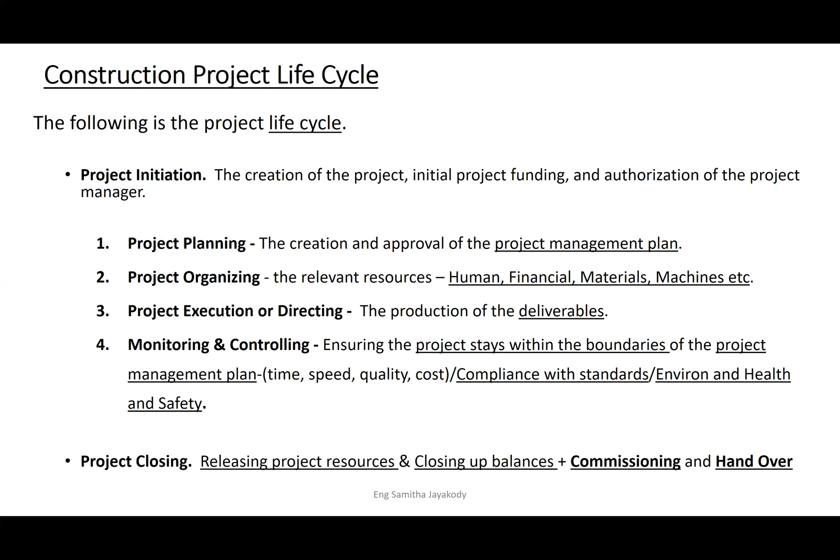Then some myths of project management. We believe in some myths, like that the project manager is the key. Normally we say he is the man, but it is teamwork. Then that projects are directing jobs; we say shouting and going in front and that stuff. Generally projects are not directing; the major component is planning. There should be a good plan. Then that progress is the key. Sometimes we think speed is the key.

Yes, but going above on the timeline is very important. But it has to be balanced with quality, cost, and safety. We can't negotiate because of the speed, the quality, the cost, the safety, and also environment.

Then project management, we normally think it is a science and art, 50-50, but it is not so. It is 20-80: learned stuff is 20, 80 is artistic, or the experience. So it is based on tacit knowledge rather than the learned knowledge. That is why when a project manager becomes matured, he becomes more efficient, well experienced and more effective on

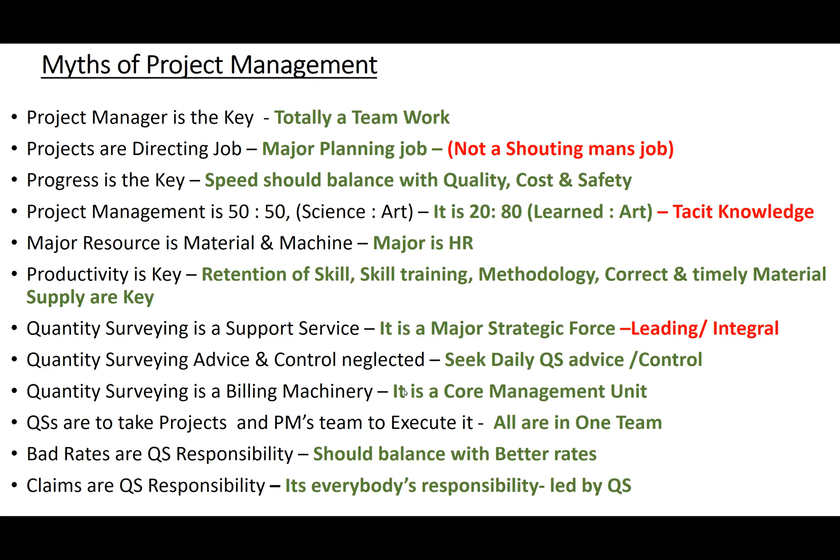Then claims: it is a QS responsibility, but it is everybody's responsibility, maybe led by a quantity surveyor. So construction, quantity surveying, everything is interdependent activities in a project. So we should know these things before we go into project management education.

Then major project areas to be managed is very, very important. And I have given all the planning documents and the tools on these major areas. Why I have scoped up this area is because some project managers unfortunately manage one or two aspects of what I'm telling. He may be a scope manager, but you call them project managers. Then he might be interested in progress and time management, but it is not like that, it is a big picture.

So we have to manage scope, progress and time, quality, safety, environment and health, cost, communication and data and reporting, human resource and subcontracting, procurement, contract management, resources and waste management, then protection and security, risk management, and we have to do integration management as well. So from today, we have to seek the big picture. Sometimes we may be seeking only 1, 2, 3, 4.

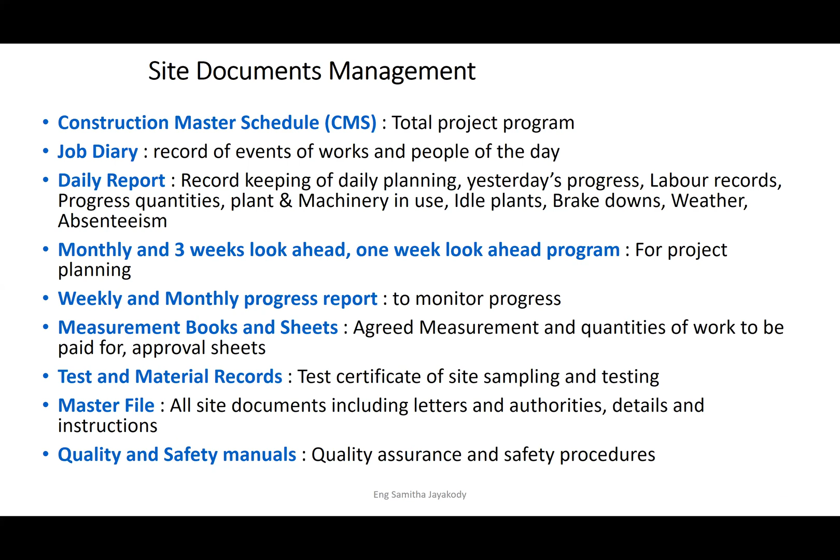Then if you take the project team, there are 4 tiers. The client and the principal or the promoter, then consultants are there, or the engineer to the project. Then the contractor is there. Then other teams. Other teams are construction management teams, financing teams, other special subcontractors, special consultants like acoustic, green.

Then local authorities, BOI, if you're doing duty-free projects. Then material suppliers will be there, the government organizations, authorities, then the environmental authority, UDA; all these are other people. So there's big teamwork.

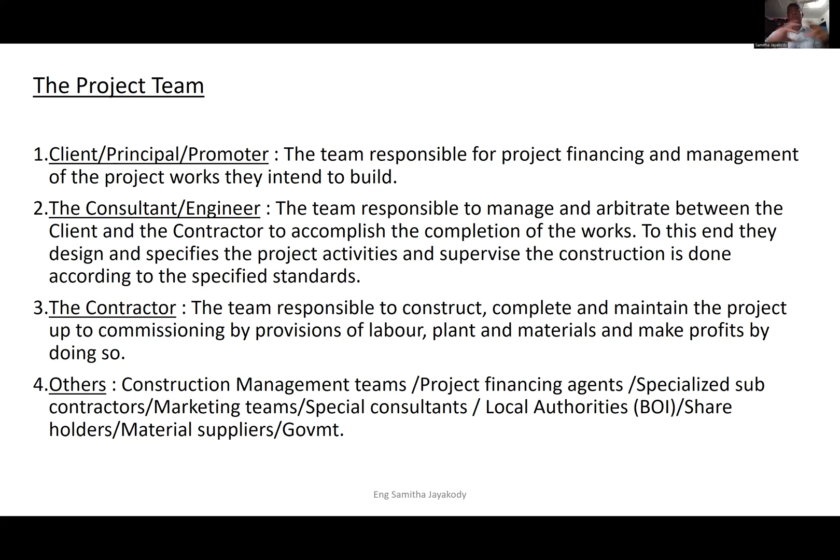Then when we are amalgamating different teams or factors or entities, institutions, we have to have a good bond. So that is why each and every bond is being contracted. So the contract is a legal document between two parties or tri-party or maybe more, binding them to fulfill some duty or activity. So when the teams are more, different contracts will be there. So the main contract will be there, subcontract agreements will be there, supply agreements will be there, 1000 agreements.

So managing the procurement is also very key. Sometimes we miss one, two, three of the major key areas, which will indirectly affect the effectiveness of our project management. So we have to have balance, not to miss anything. Sometimes we do everything, but our safety and also quality management is bad. So then there will be a lot of repercussions.

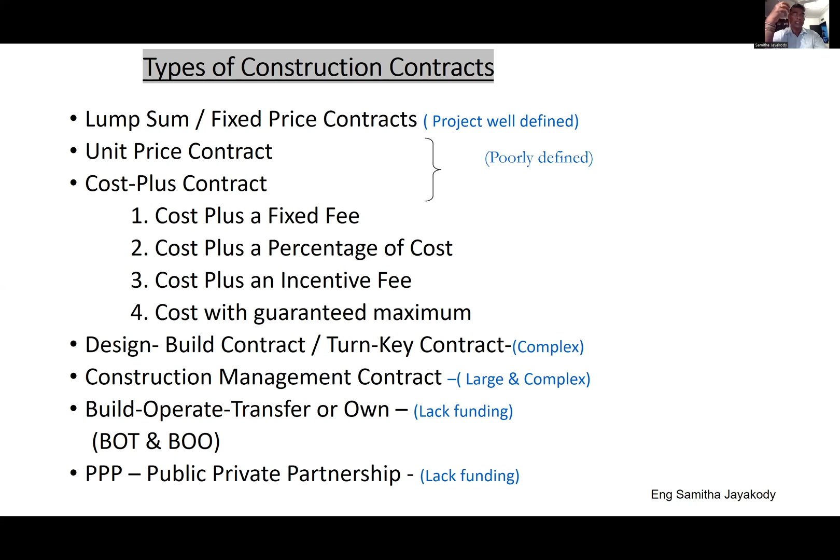Then, project management software packages are tools. I have seen a lot of people become slaves to these tools, and it is not a fashion. Tools we use to create a good environment, which is to make our life easy, because with progressing and planning we can't keep everything by heart. That is why we are using software. But software is not project management; it is a supporting tool.

So we must get the support from the tool and execute physically in projects. Many people are slaves to things, even design, even planning. You do everything in software, but you have not visited the site. You don't know what is happening on the site. That's bad. When we are using software, we have to scale it, visualize, then logical intervention has to be there. All this has to happen by a human. So if the human using this tool lacks experience, there will be repercussions in the output. Garbage in, garbage out; if lacking information is the input, your reports are also not complete.

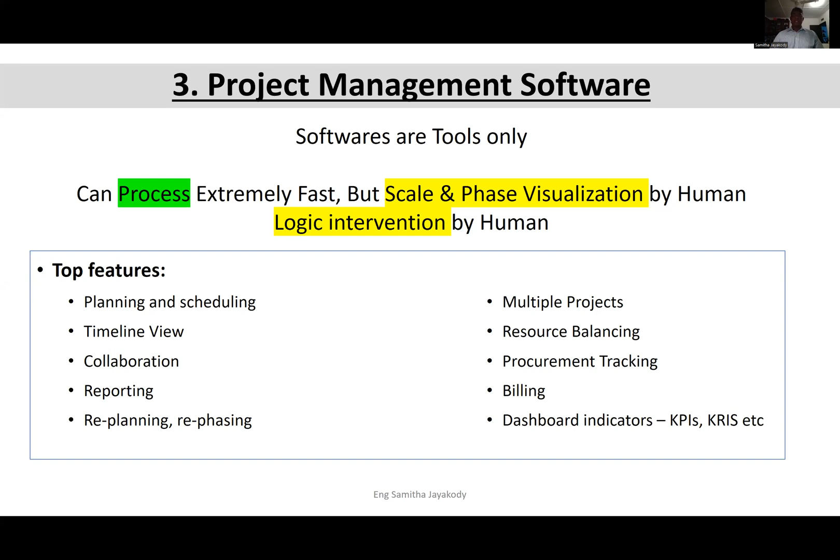And top features: we are using software for different things. I have given billing and everything, planning, collaborating, reporting, everything we can. So why not use software? We have to use software aggressively, but the intervention is human. The human touch is much appreciated and demanded. Then the features: you can keep all the data, safeguard it, reproduce it. So I have given the computer and its features and advantages.

In projects, we will be very extensively using MS Project in planning. Sometimes once the plan is done, nobody looks at it. It's huge, 500 to 1,000 pages, but you don't utilize it. Based on your requirement, you can summarize it. Then the planner who is planning this has not elaborated or transferred all this information to the respective doers. That is where there's a lacking. So this planning tool has to be simple and understood by each and every management tier, and it has to be practical.

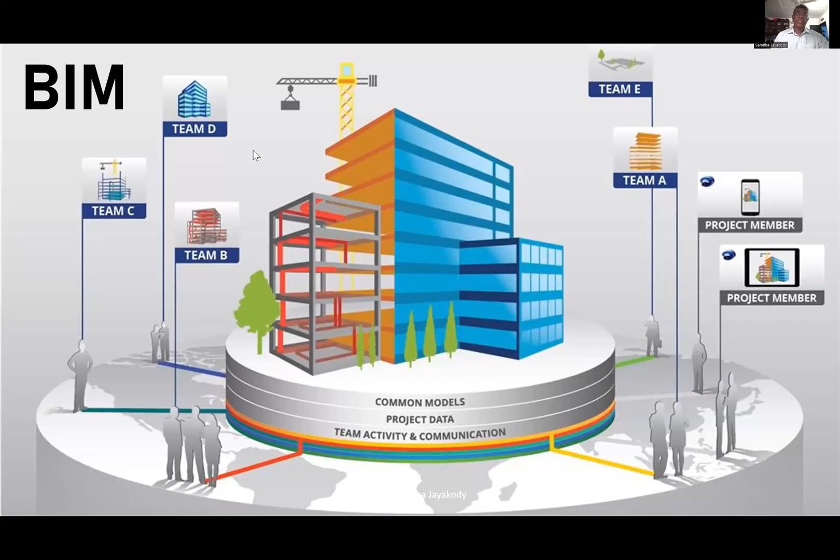Then what is most important is not the data, but the information. Data is something like all these figures, but when you convert it into information, it will give trend lines, colors, like a dashboard. So we can get some sensible information. What matters is not the data but the information. Sometimes our computer will be full of data, but nothing comes out as profit or loss or rate analysis, something like that. So it has no meaning.

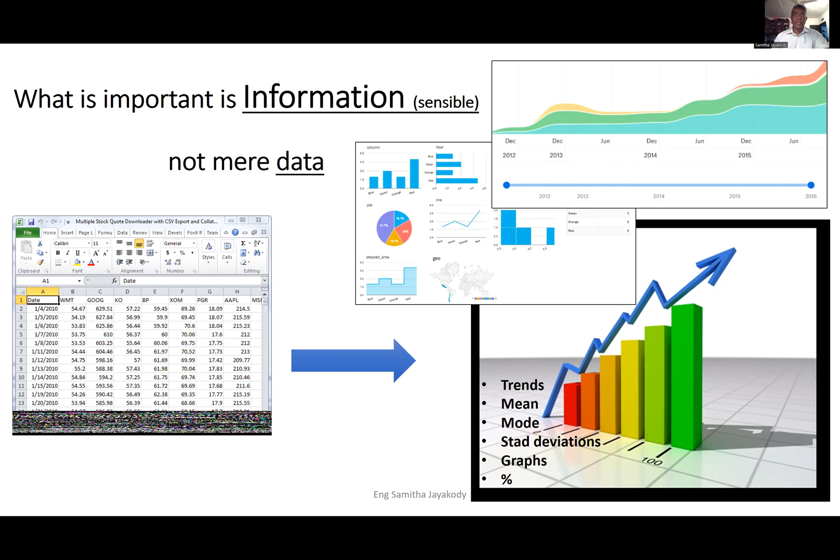Then when you move to pre-tendering, when the projects are being offered, whether you are on the client side or the contractor side, we have to go through the pre-tendering stage. There, if you take a contractor for example, we have to formulate the tendering team or bidding team, the tendering and quantity surveying outfit, we call it. And there are roles in the bidding. There should be a team leader who is inspiring, a leader, wise, innovative, team spirited and a listener. Then we have to have a good coordinator in this tendering team, because now we are going to get a job or give a job.

When we are formulating this team, we have to cast different people to act in these different roles. Then the coordinator, the organizer, will have knowledge in all the aspects. Then a contract specialist should be there.

He should be a good reader and a narrator. Then qualified in knowledge in contracts. Then a civil expert should be there, who knows all the civil engineering aspects, construction. Then MEP expert, material expert, plant and equipment expert. Then there should be a subcontract and labor specialist who has good knowledge on outside rates, their outputs, then the market, demand and market rates, and the availability in all these aspects.

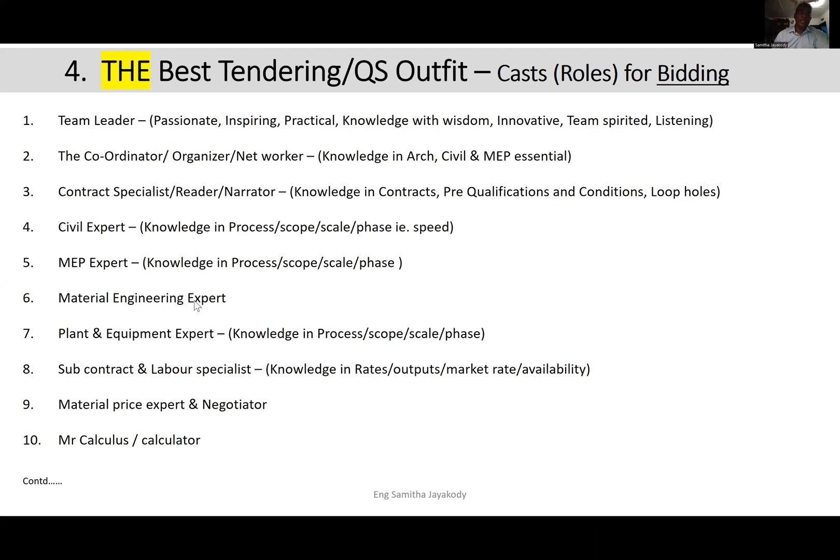Then material price expert, who is a good negotiator and an expert in material pricing. All the materials he has at his fingertips, the prices and different locations. Then there should be Mr. Calculus, who is very good at calculating without missing any major data. Then there should be a planning engineer who knows about planning and milestoning, productivity. Then scope extractor, who is getting all the basic material and the locations from the BOQ, has the big picture about the scope.

Informant, that is getting information from outside. So different companies now have these projects, and they have enough projects or there is a lack of projects. Their appetite for projects, right? And are they going for better margin or lower margin to get a project? So that's informant. Then timekeeper, who communicates the time. Okay, another 1 week we have to now wind up.

Then intuition expert, the moderator, proofreader, compiler, then specialist, and extraordinary task seeker, who is looking at very special things in this project, what are the basics you will have to consider. Then strategist, then won-loss project post-mortem expert, because past history, are we having the winning streak or losing, why we lost. Transport expert, claim, value engineering expert, and different people will look into their aspects, whether there is any value engineering that we can do here. That expert will look at it. And the environmental and social specialist, so they will know what is the environment and the green and so on. So this is the winning team.

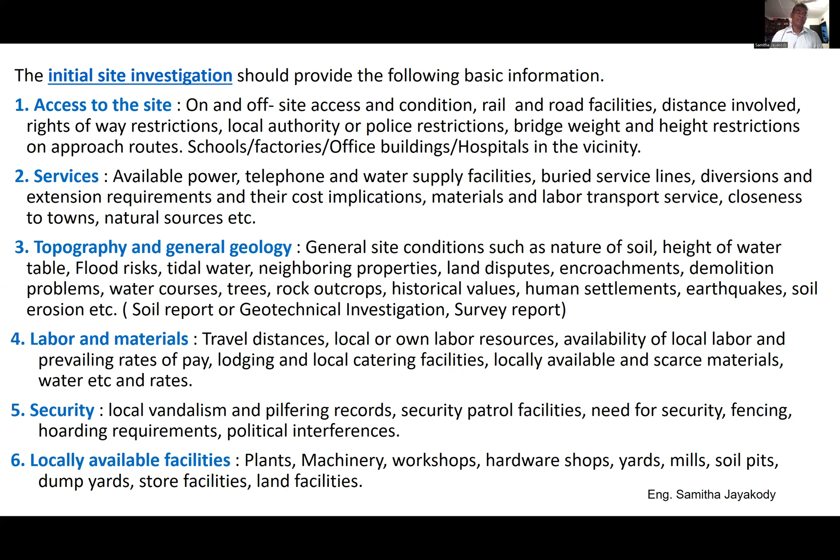Then topography, then the general geology, rock, soil condition, then historical value, human settlement, trees, water courses, then erosion probabilities, sloping ground, disputes, neighboring properties. So those are topographical and geological information we have to take. Then labor and material pertaining to that particular area has to be studied. The lodging, maybe catering, the food. For example, if we are planning a project in Jaffna, we have to see all the things. So topography, geology, different. Then labor and material different, because we have to take labor from here to there.

Security is very important. Then locally available facilities are also very important, like soil pits, mills, yards, dump yards, quarries, and so on, because we have to buy material. So that is the initial site investigation.

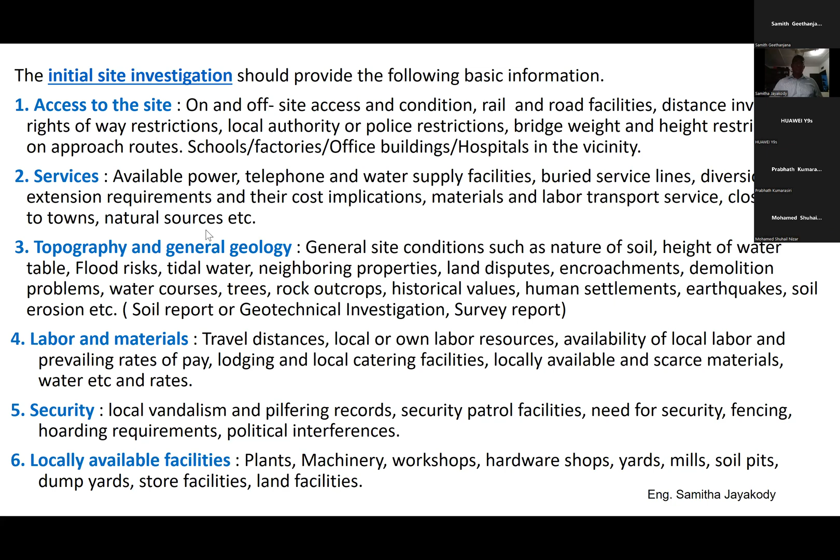Then engineering study of the project, visualization is very important. You have to identify the client, the consultant, type of the project, funding agent, other stakeholders, competitors, and likewise we have to visualize all of this.

Then I mentioned that we have to extract the total material quantity. This is in pre-bid, we have not yet taken the project to manage. So during this exercise, we will be taking all the levels - floor area, concrete in meter cubes, reinforcement in metric tons, formwork, brickwork, tiling, painting, and others, ceiling, everything.

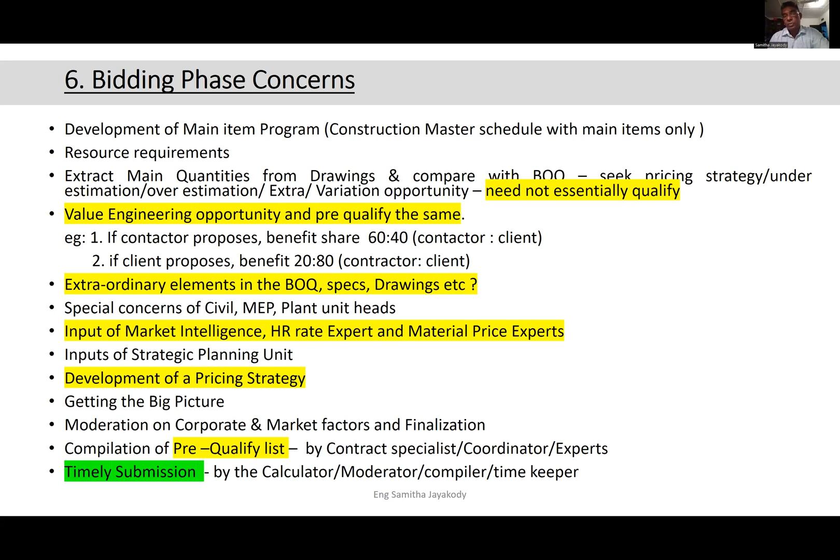Then extraordinary elements in the BOQ specs - what are the things, then input, market rates, pricing strategy, and some idea about the big picture. Then pre-qualification list, that is very important in the bidding stage. Then timely submission - so in the bidding phase, we have to be concerned about this.

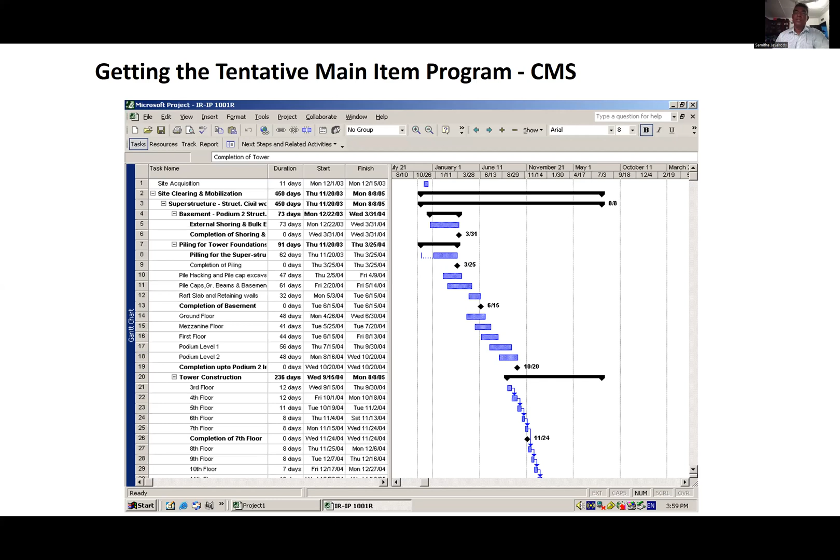So I said we have to do a basic program, something like this, 1, 2, and 3. That's all. So that will be given, maybe for a 2-year project, and everybody understands how the structure goes on and how the finishes go on.

So basically they can have some idea when to start, when to finish, and there are no links, right? Then in this pre-bidding phase, the bidding phase, we will be taking from the earlier schedule the monthly productivity requirement - it is very important.

Quantities in monthly requirement. So for this example, I can say that formwork monthly production output requires 2,500. Reinforcement 80 metric tons. Brickwork 900 square meters. Likewise, month-wise, we will get all the monthly production requirement.

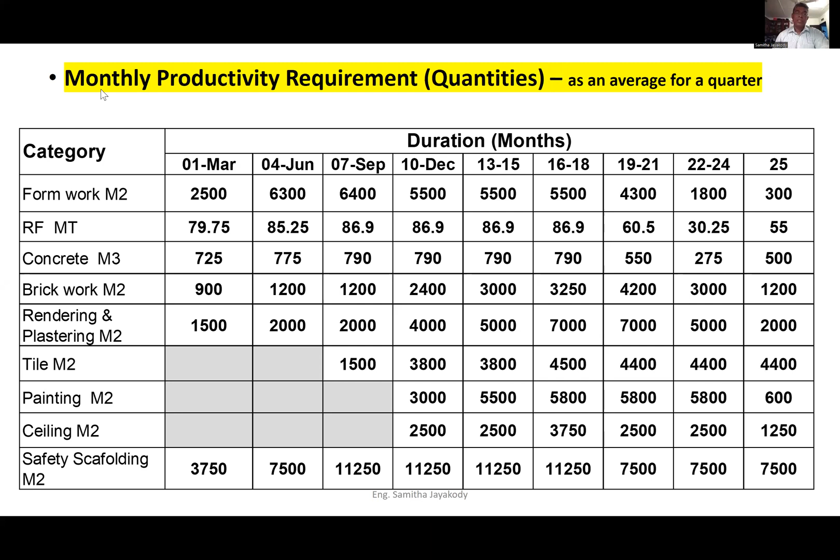So in the early months, we have only reinforcement, concrete, brickwork, excavation, those stuff. Later on we will be having tiling, painting, and so on - per day, per month. So from the monthly quantity, we can derive the daily productivity requirement.

That is, in this project, daily we have to produce in the early first 3 months - each month we have to give 100 square meters per day. Reinforcement 3 metric tons per day.

So from there we will jump into our labor requirement per day using norms. We have norms. For example, if you take formwork...

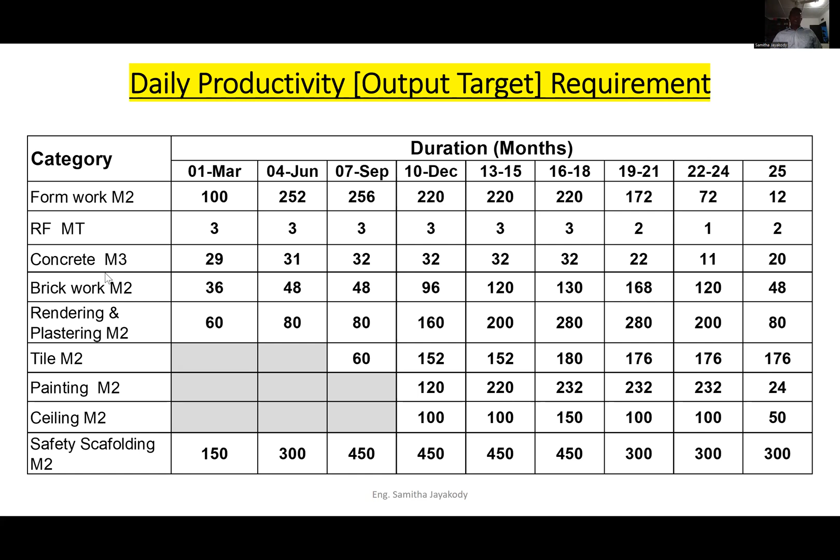150 to 200 kilos per person per day. So based on that, we can calculate what is the labor requirement. So in this case, we require carpenters, 25 carpenters per day. So based on that, we can get all the labor requirement in months.

So this is a more than 1 or 2 year project, and you can see that across the months we have to have this labor force of 97. Likewise, from the 4th month, we have to increase the labor strength to 200. Likewise, we can calculate our labor force throughout the project.

So there are nearly 400 workers in the 16th, 17th, and 18th month. So that is the peak. We have to arrange our labor camps based on this. Sometimes we will be arranging labor camp for 200 people, and later on, once the building is done, the balance we can send into ground floor, basement. Or else we have to have a labor camp for 400 people. Gradually it can be increased.

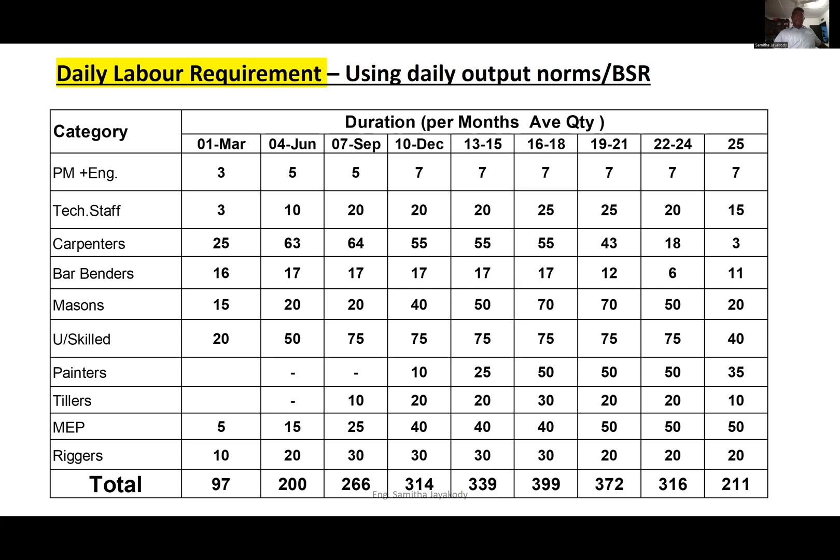And preliminary, under preliminary, we will be charging it. So likewise, we can plan. This is pre-tender, during the tendering phase. Then scaffolding requirement, also we have to plan in this pre-qualification or pre-tendering stage, because we are now planning to get a project, so what is our involvement. Based on this, our cost will differ.

Then we have the plant list. There also we calculate our plants and in what quantities. So in this case, you can see cross-cut saws. For carpenters in early months, it is 10, and it is going up to 20, so 20 peak per day cross-cut saws will be required. So then we can cost it, maybe hiring or maybe buying.

So quantity surveying, that is why I told it is going hand in hand.

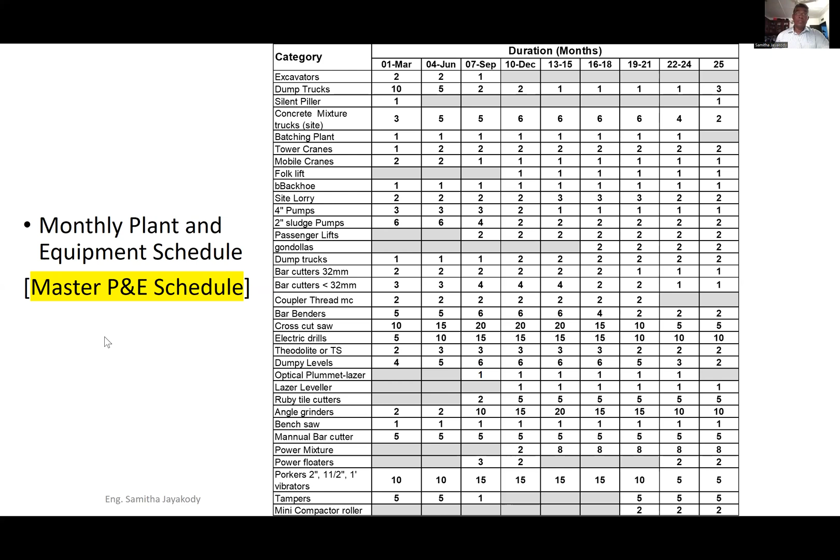Then material requirement list. Based on the total extraction, we can see what is required in this project: sand, admixtures, metal, different bars, reinforcement, then hinges, then granite requirement, lock requirement, plywood requirement, brick requirement, block, tiles, ceiling, likewise. So when you have this, we can negotiate with our suppliers. Sometimes we call this forward integration.

I will show that cement, if you have the bulk cement requirement in metric tons, it is 17,000. So it's a huge quantity. We can negotiate with some suppliers: okay, if I give all the aspects to you, what is your best price? And we can have a strategic partnership, that is we call forward integration, and we can get a better price than the market, assuring that we will give all the total material, we will buy from you, so give your best price. So likewise, we can have a pricing strategy.

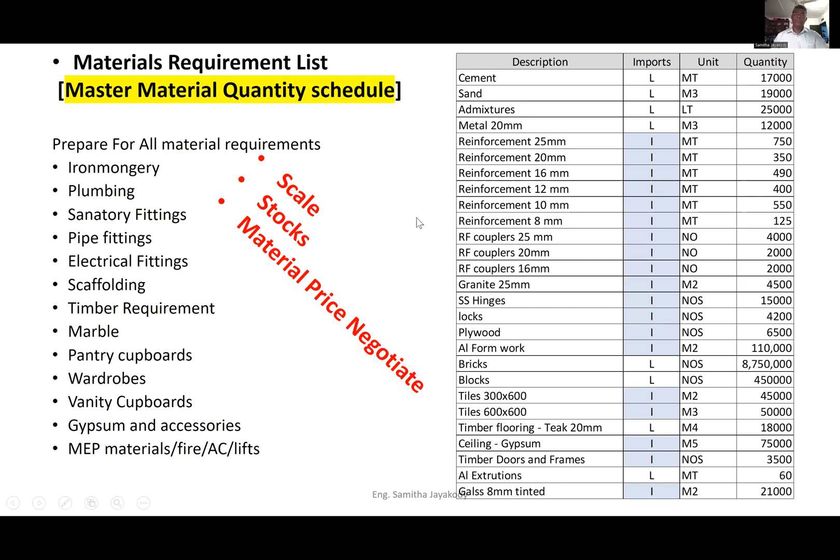So if you do a shabby work, you will be missing this tool advantage. If you go by this procedure, it is easy and very scientific. Then when you are pricing, there should be a formulating of pricing strategy.

So normally bidding price is based on our pricing criteria. It is an amalgamation of basic cost, which is very common to each category. For example, basic cost in Colombo for grade 25 concrete for major contractors, CS2s, Maga, ICC, Sanken, Access, like thing, the basic price is same.

Then to the basic price in total we add markups. Markups are an addition or percentage increment. Markup consists of profits, normally 5 to 10%. Then head office overhead, site overheads, then different costs and risk factors, the quantity price risk. Normally we put 3 to 5% in the quantity risk if we don't know the quantity. If you have very dicey pricing, we also keep a pricing percentage. So add on, it is about 25 to 35% markups. Plus preliminaries, normally 5 to 8% from the total budgeted thing. That is how we check.

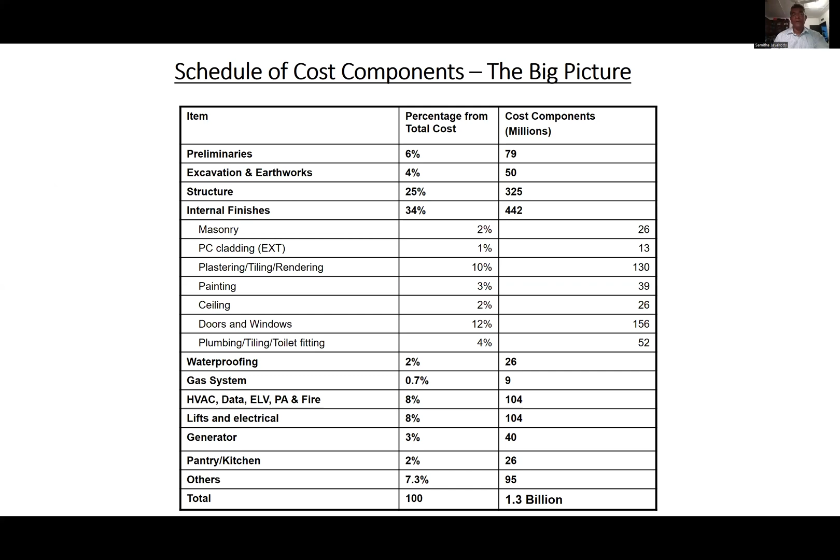Then pre-qualify conditions: we are using this cement type, this cement reinforcement brand, this formwork, aluminum brand and silicon is this, mix designs are this, early removal of formwork facilities are this. Likewise you can pre-qualify, which is very important during this.

Give elaborate assumptions: this is our dollar price, assume the tile brand is this, likewise qualify the pumps, the AC air conditioning brands we elaborate, ironmongery we elaborate. After that, the client or anybody can't ask for the sun and the moon, because you've already pre-qualified. We price based on these categories.

If there's something missing, it might come out during the evaluation. The guarantees and warranties, then nominated subcontractor concerns, electrical fittings and accessories, the brands and everything, missing items, risk, we can qualify.

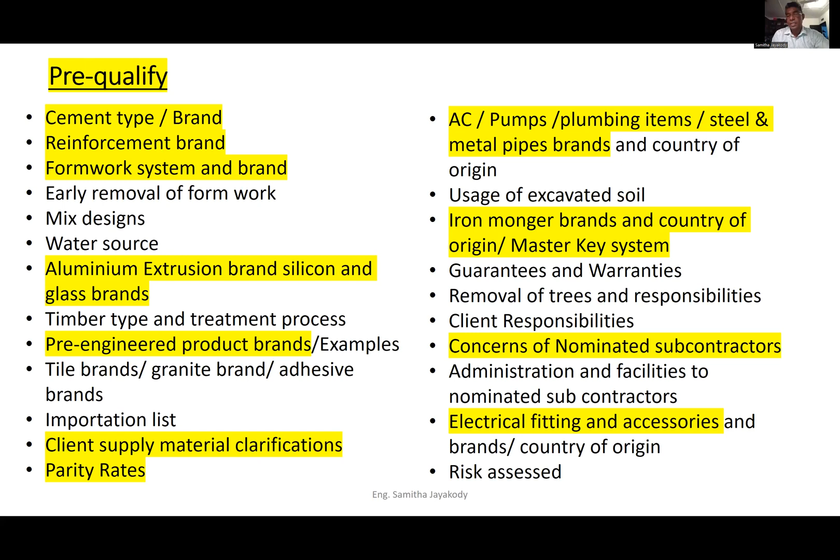Then we have to check outcomes. You can use unit price rates to check whether your total figure is correct. Output rates and steel concrete ratios are there to check. If it is normal concrete, it is about 110 kilograms per meter cube. If it is earthquake design, moderate, it should be 150 kilos. If it is moderate earthquake, not minor, well detailed, it might rise up to 225 kilos per meter cube, a little larger.

So we can check if the structure is given as earthquake resisting and the reinforcement is very low, then we can pre-qualify, thinking that it is missing the earthquake moderation. Something like that we can pre-qualify. Then if there's a claim or something, we have already pre-qualified.

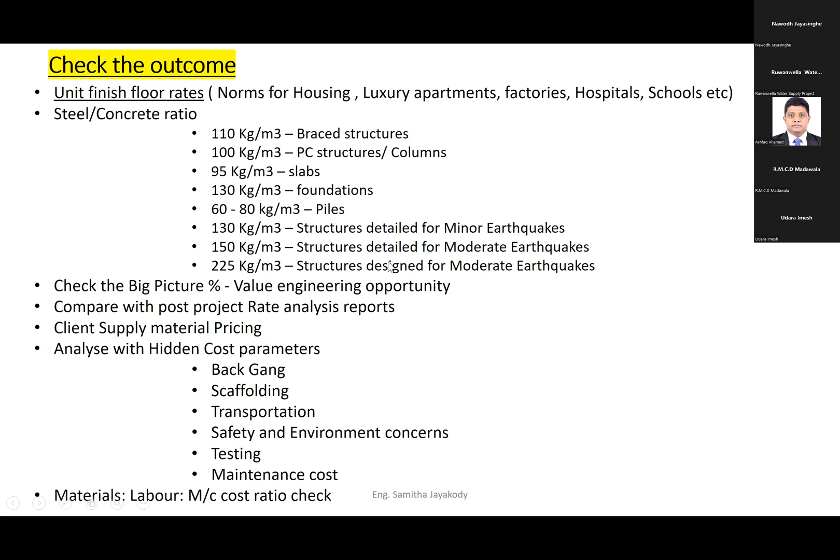Then analyze the back gang, scaffolding, all these things. So while we are still pre-qualifying, we can also do a bidding strategy: low profit margin for structure, then a little higher for MEP, and propose value engineering options with precise extraction of quantities and clear scope.

Underestimate or overestimate, we can say. Normally, overestimation we do not qualify; underestimation we qualify, meaning the total will be more than this.

Qualify anticipated rates. For example, there is no rock breaking, no concrete breaking allowed for if some structures appear during excavation. So we can qualify that if there's rock breaking or chemical blasting, we will be charging 30,000 or 40,000 per meter cube. That's very important. So we can give a better rate there, but it's not included in the evaluation because it's missing in the BOQ, yet you pre-qualify it.

Then we can give a proposal for better client cash flow support, and the client will be happy. Sometimes contractors tend to load the preload or front-end load the pricing, so the client will see they are trying to capitalize on cash flow, and they will select a better contractor who is not doing that.

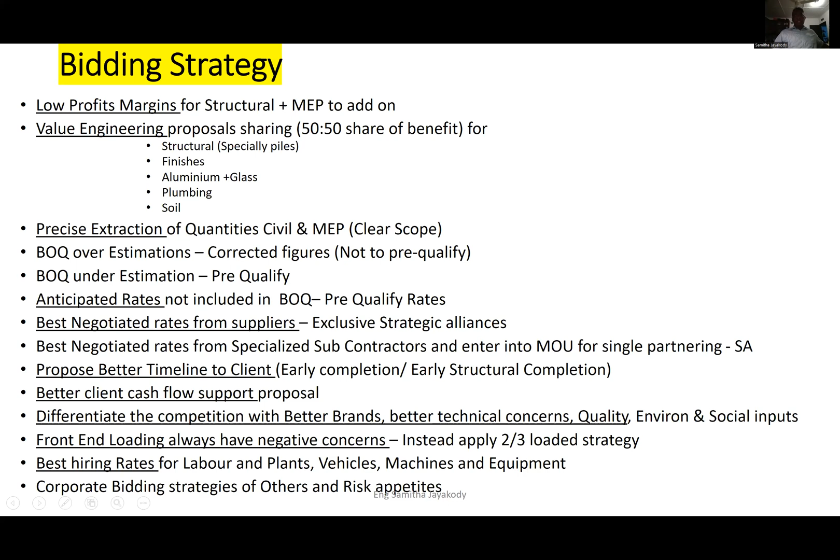Likewise, we adopt a bidding strategy, and we do the bidding and we have to win. If our strategy and our working is very scientific, you will arrive at a scientific solution. If you do it correctly, we can win a project because we also strategize the bidding quantities and the rates.

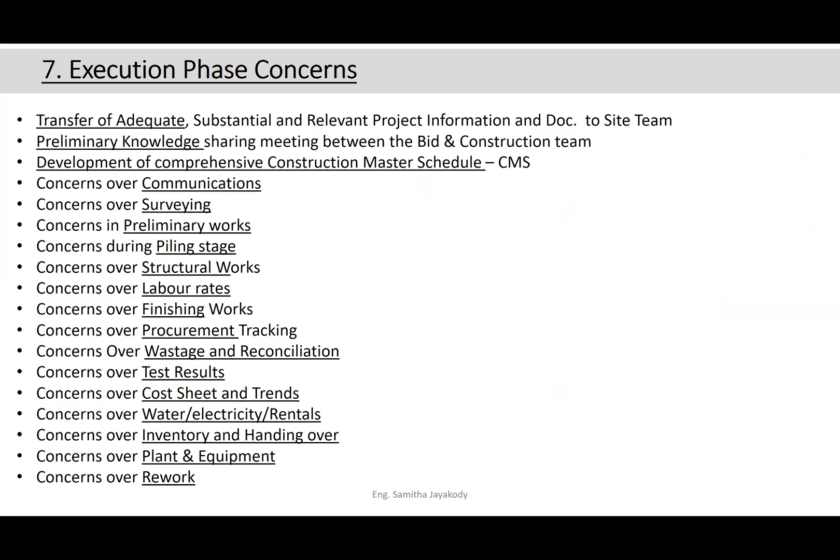Once we win the project, then it comes to execution. The execution part has different areas: preliminary work, piling, structural, finishing, procurement, wastage, testing, all these things come in. Once we win a project, we send our team to construct.

The first instance in project management is transferring all information gathered during the tender period to the site, what we call office to site. I have seen a lot of information getting missed during this scenario, so each and every detail must be covered in a briefing from the bidding team to the construction team.

That is missing in Sri Lanka. Because of that, a lot of vital information will be missed by the construction people, and later on they will find these areas were planned badly because of lack of information.

But the bidding team should have all these things: pre-bid meeting, negotiation criteria, and so on and so forth. For example, our concrete rate would be very low because in the negotiation we may have given a very marginal rate for concreting. So if the construction team has to have a lot of concern over concrete because wastage has to be very minimal, then they will take a lot of precautions to be extra cautious on that particular area. Likewise, steel also we can do. So wastage has to be minimized then.

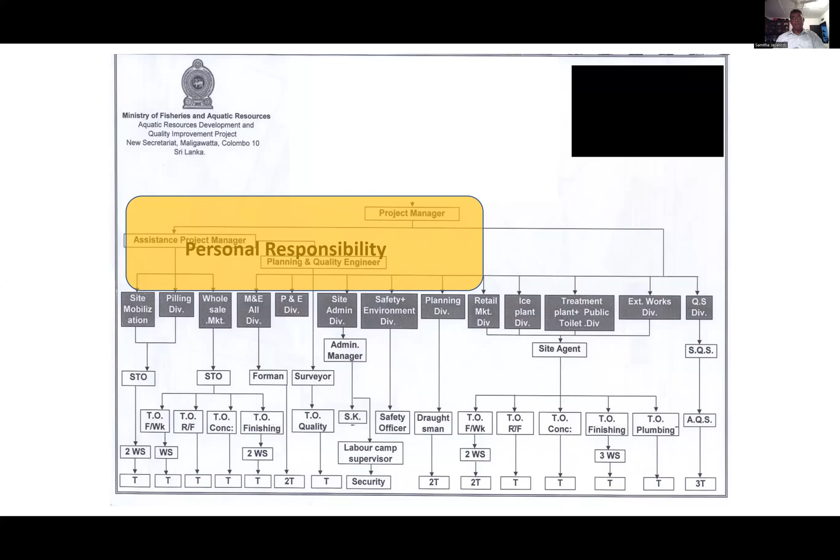So in the organization chart, there are levels: personal responsibility. Those are the top people. They are accountable, not even responsible, they are accountable. And in the middle, you have functional consideration. So they will look after the divisional objectives. Then the lower people, they are concerned about trade, their activity. If there are reinforcement people, they will look after that only. So you should never mix. But functional people, that is the managers, they should mix formwork to reinforcement, concrete to formwork, likewise.

But if everybody, even the top managers, are also trading the concrete only, that is the problem. So in different levels, our objectives will be different. So don't think at project manager level that you are a trade-concerned person, that you are promoting only concreting. No, you have to promote the functional harmony of the divisions and also the overall client management, everything.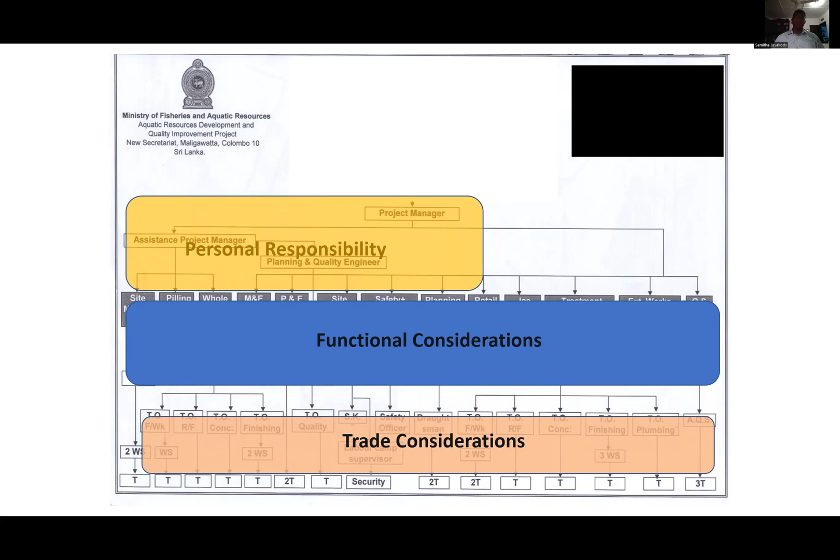So once the job is awarded, we have to prepare the detailed CMS. That is very detailed normally. For example, if you take a project like Havelock City, there will be about 500 pages of program. And we have to have summarized systems and also a monthly program based on the major schedule. And there will be links, then milestones, and also what we call the critical path.

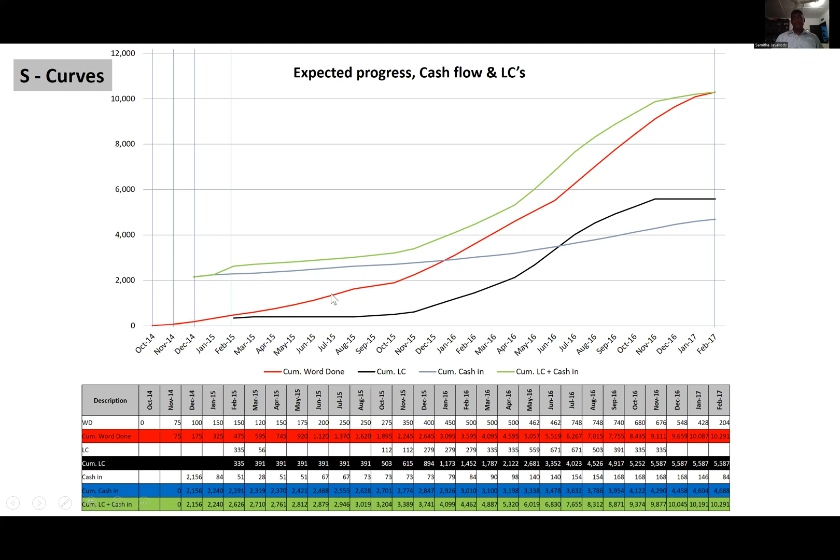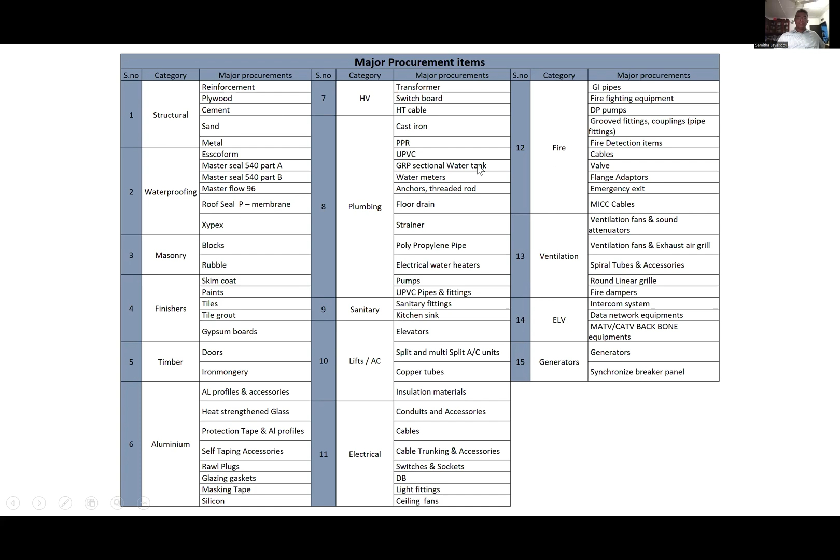Then we have to have major procurement items under different categories. For example, for structure, we have to procure steel, plywood, cement, sand, metal, things like that. So likewise, aluminium, fire, plumbing, we have major procurement units. Then I told you that for communication management, we will be using a communication protocol. So this is a particular communication protocol.

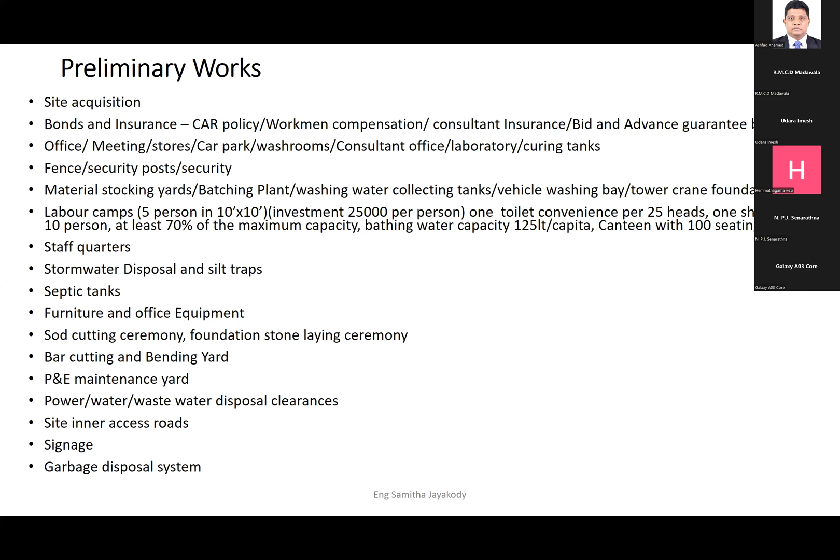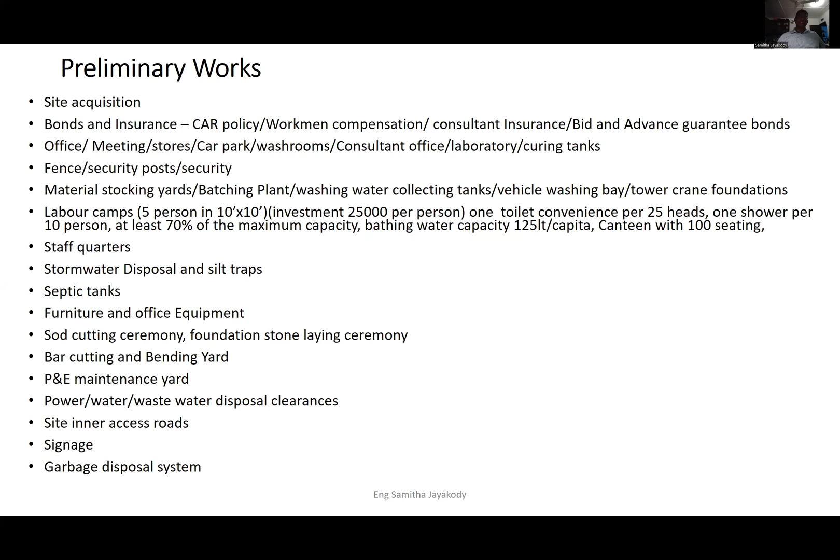Then under preliminaries, we have to do the site acquisition, bond, building the office, stores, car parks, labor camp, fencing, material yards, stocks, washing bays, batching plants, garages, staff quarters, stormwater, septic tank, getting furniture, then ceremonies of opening, bar bending yard, maintenance yards, power supply, signage, garbage disposal; all these things are preliminary. So there's a preliminary charge also. Normally it is 5 to 8%, some projects 10%.

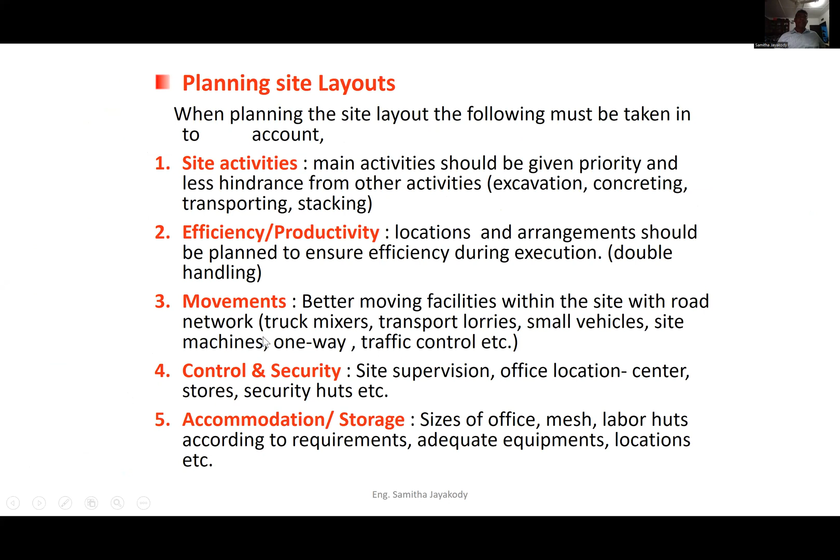So planning the site is based on site activity, efficiency, general movements, control and security, accommodation. So there we have to come out with a mobilization plan, in which all these facilities will be placed in the project. Without this, don't start. These are basics of project management. The preliminary plan, and executing that plan, is most important. Organize the material, lead them, execute and control. Check whether these things are happening.

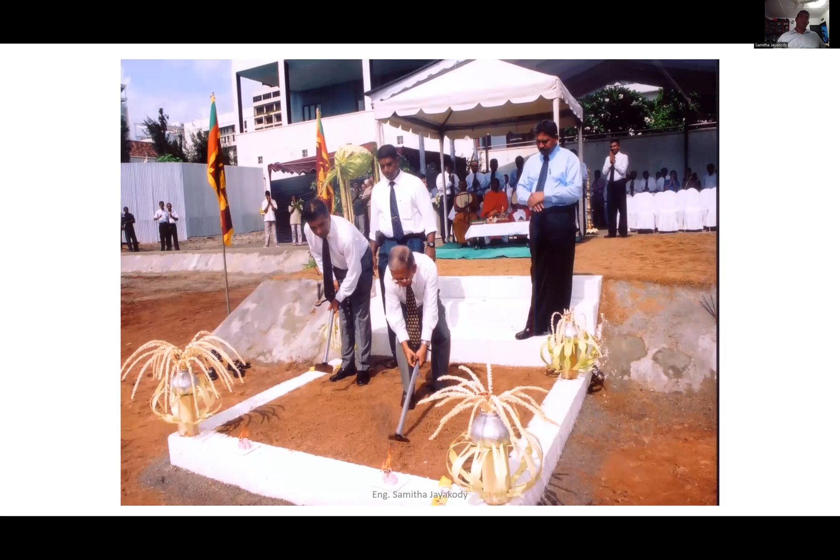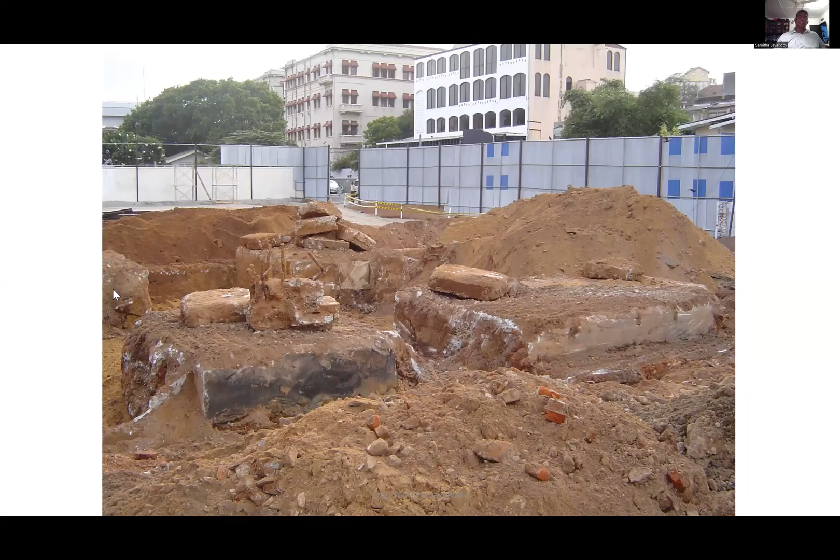So this is one example at a Colombo site. Fencing, a large fence, 6 meters high. Then we opened up the initial excavation and found some very old foundations. So extra work. Assuming this demolition, we had put a breaking rate for concrete, so we can claim. Once pre-qualified, we'll give a better rate. So from the very beginning, we will be making profit on the project.

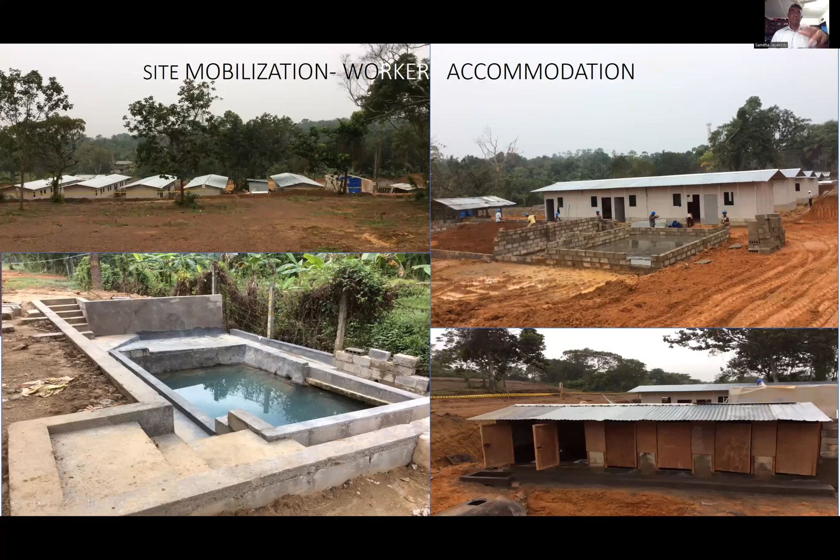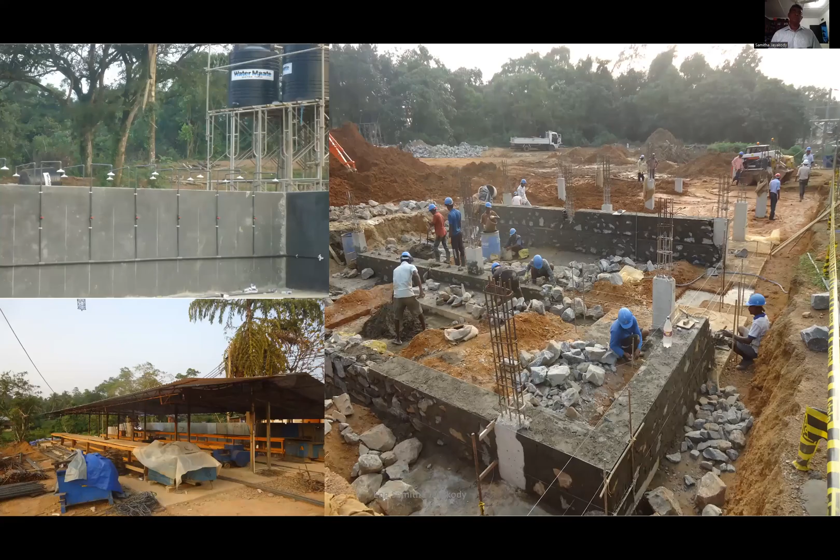Then site clearing, acquisition, putting up your office, machine plant, general access roads, labor camp, then sanitary facilities, improved bathing facilities, which can also be maintained, and bathing for everybody. These are temporary facilities to attract people. When you give basic requirements to people, there will be a lot of people, and there won't be any issue to retain them.

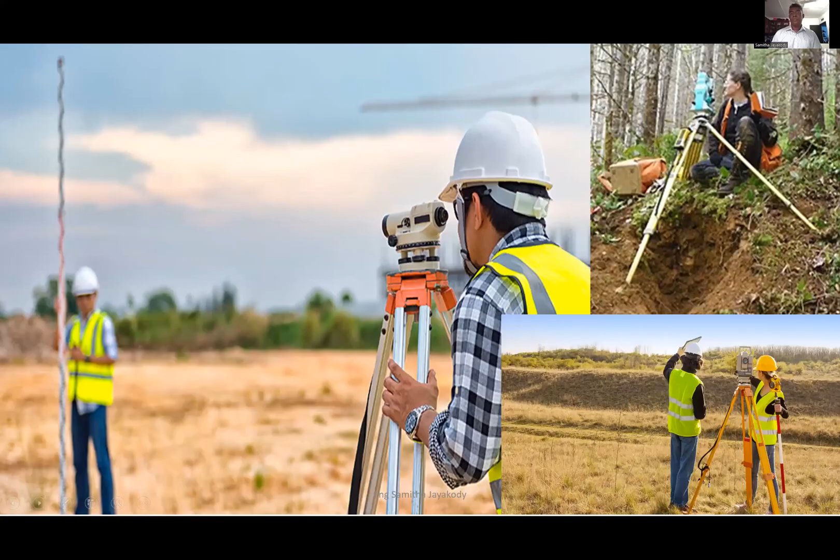Then what you see underneath is the bar bending yard, the cutting beds, bending tables, and the reinforcement stacks. These are also preliminary work. And the machine plant, a large one, tower crane erection, and so on. Then leveling. When you're leveling and setting out, we have to have the plans, the site plan and the contour maps, then study them based on the given details. So first we have to take spot levels and check the boundaries like this. This is a particular example of a project.

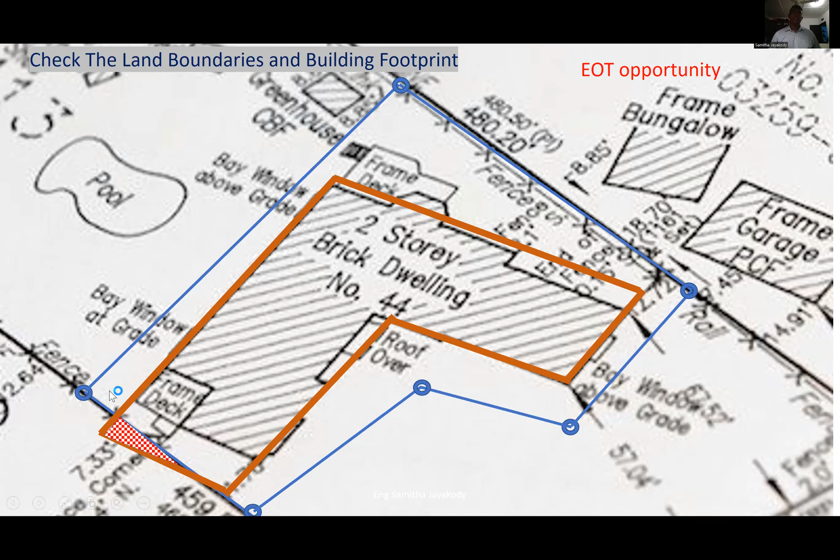Then take spot levels 5 by 5. Don't miss these basics. Then get benchmarks. Jointly agree the benchmark, the ground level, the road level, and the excavation levels, all in writing jointly. One example is you have the soil surface, then you get the reduced levels, and we assume the rock is underneath. Sometimes the consultants might assume that the rock is somewhere, and our excavation is something like this. Based on that, we decide the ground floor level, and excavation and everything is strategized on that.

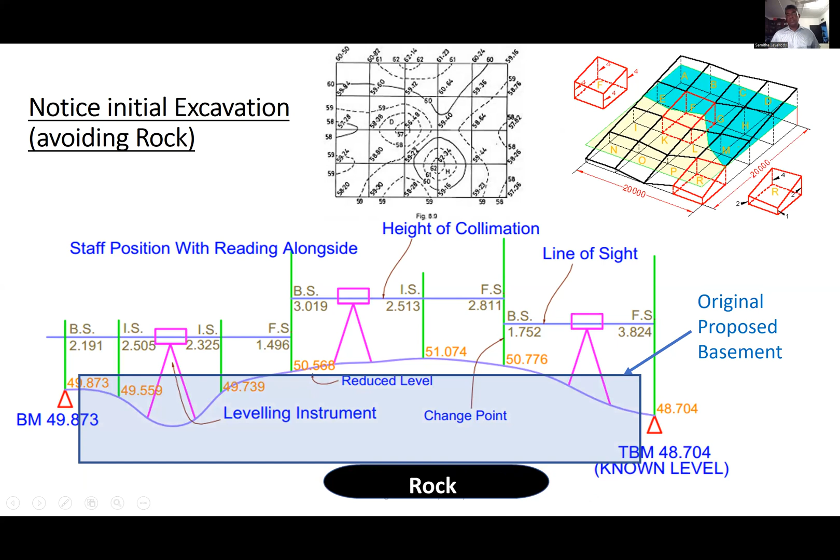But in the actual case, you can dig and see the rock surface. Sometimes the actual scenario would be like this. Earlier there was no rock. Now in the actual scenario, when you excavate to such a depth, there will be rock exposure. So since the rock was not assumed there, it is extra work or additional.

So it could be a variation because it is not intended in the basic BOQ. So if you pre-qualify rock breaking, you will be paid, and at the same time we can ask for extension of time because it's a variation, not additional, because it is not mentioned in the BOQ. If it is mentioned in the BOQ, it is extra work. So additional work or variation, whatever, it's an opportunity in the early stages of the project.

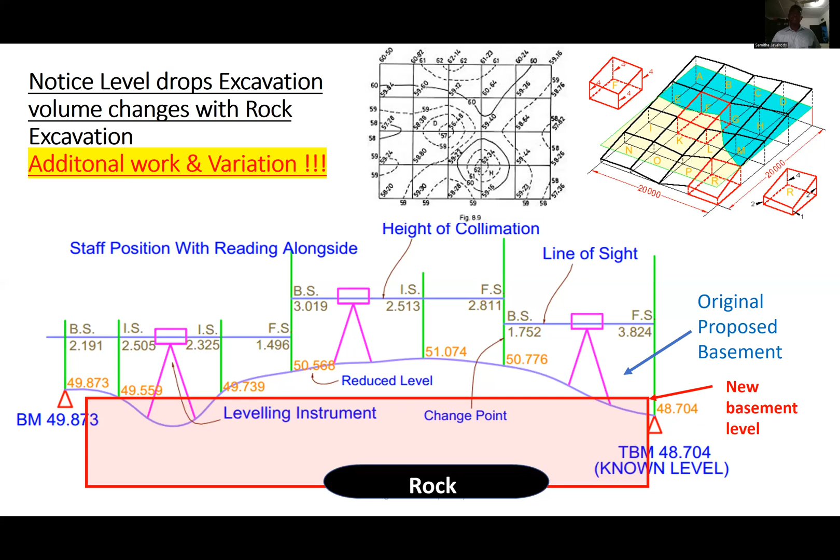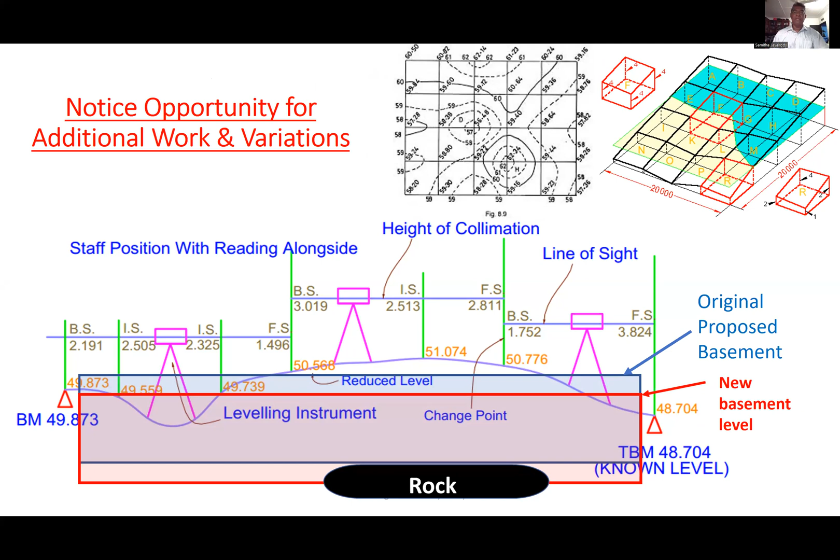Then we can propose a new ground level by raising this thing, and when you raise it, your cut and fill will get affected. Normally we have to balance the cut and fill, and if the cut is more, better, because we have additional soil which you can use for landscaping or some fill. But if the cut is less and the fill is more, we have to import external material, which is very difficult and costly. So it's very customary that we balance cut and fill within the site, then we can manage something like this.

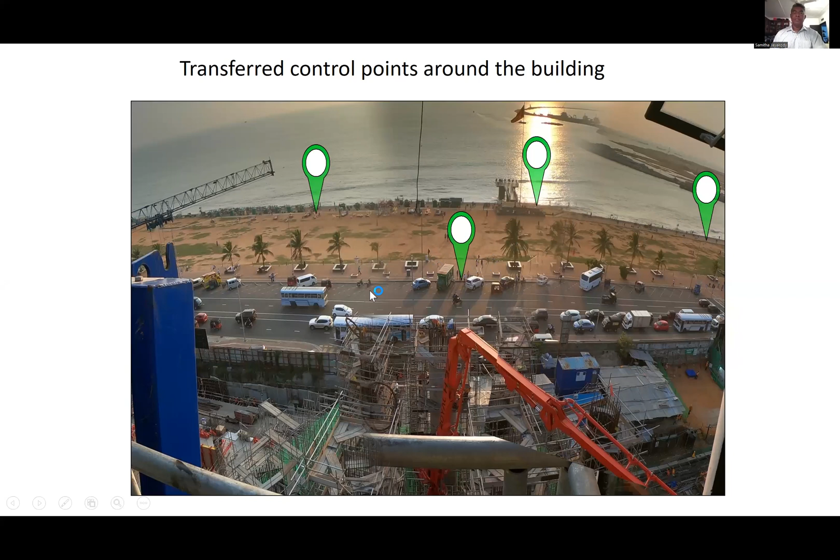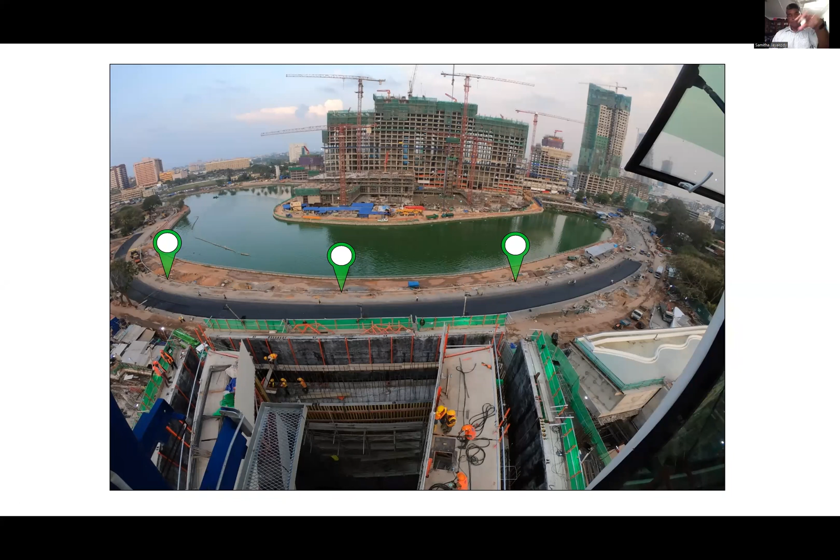Then the setting out and the permanent positioning. Control points outside the particular building are important. So this is one project that we handled. We put our control points in the Galle Face Green. These are permanent points; even now they exist. The building is now completed. This is one side. We have 4 points. Behind, this is the waterfront. In the permanent structures, we have these points. So based on that, using them as control points, we will be checking the tower position and also levels.

So the normal procedure is we consider each 5th floor, 5th, 10th, 15th, and likewise, as a major control plate. Once a control plate is being set out, we have to use the control points outside. Once it is established, using that plate as correct, we will be putting another 4 or 5 stories above it. So you don't check. Once you reach the next 5th floor, we will be establishing by looking at the bottom. But once it is established, we will recheck from the outside control points whether the positions are correct.

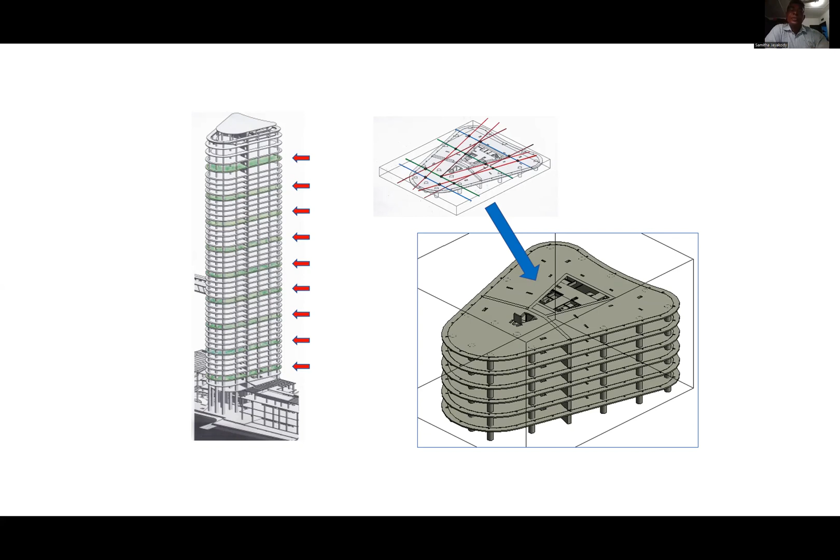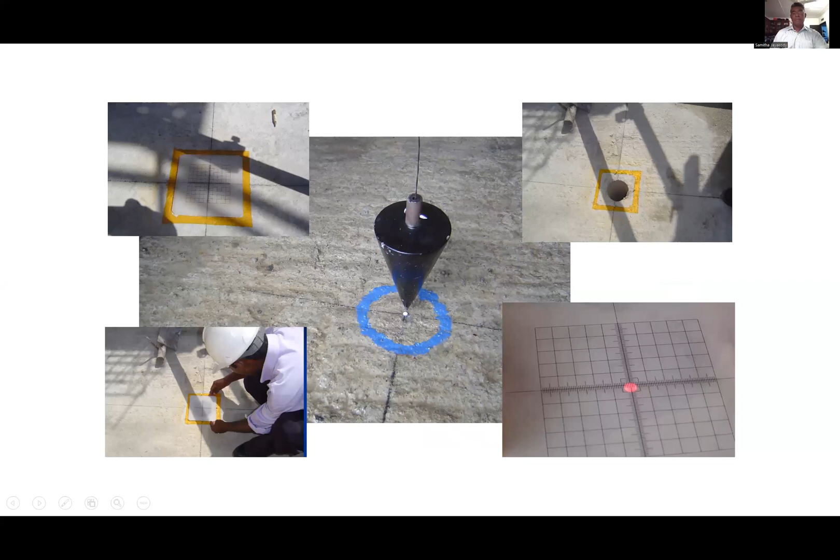Normally, it is plus or minus 5, 7, 10 millimeters. And when you're going up, the tower will move here and there, so this is very important. For that, we will be using different equipment: the Perspex sheets to get the center, then the optical plummet. Normally in high-rise buildings, we use at least the laser plummet and the theodolite or total station. For the level, we have to go by benchmarking at each floor level. When using the total station, we'll be using satellite facilities, and X1, Y1 and Z1 will be decided on that.

Then the construction phase, substructure and superstructure. When you take a high-rise building, it has an anatomy. We have the lift core, then the construction below ground, which incorporates the piles, the raft and the basements; we call it substructure. What is coming up from the ground is superstructure.

In the bottom floors, maybe beyond the ground floor, 1, 2, 3 floors, we will be putting the podium. There we will be using mega columns, large beams and large span slabs, because we want a lot of space there. Large span means 8 meters, 10 meters, or even more. Then when you go into the tower, the span gets reduced, shorter span. Then we can have walls, columns, flat slabs, and repetitive work to speed up. So there will be 2 different structural systems. To tackle that, we will be introducing a transfer floor.

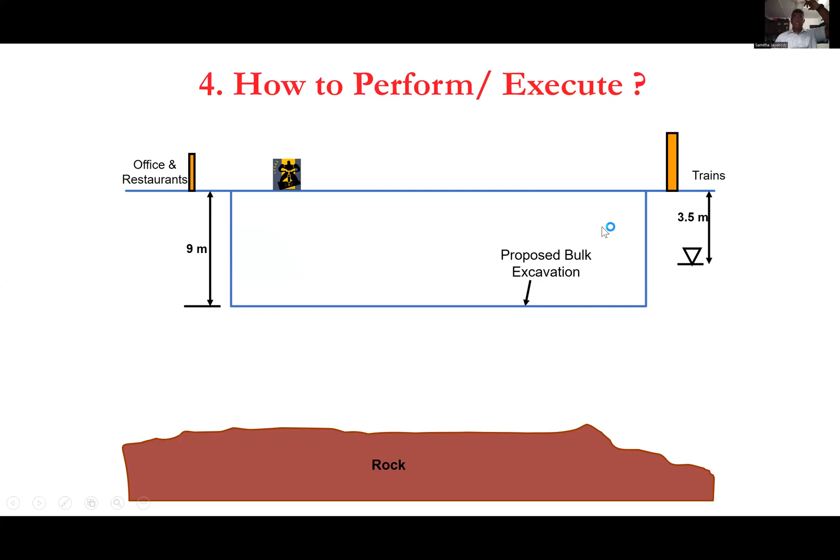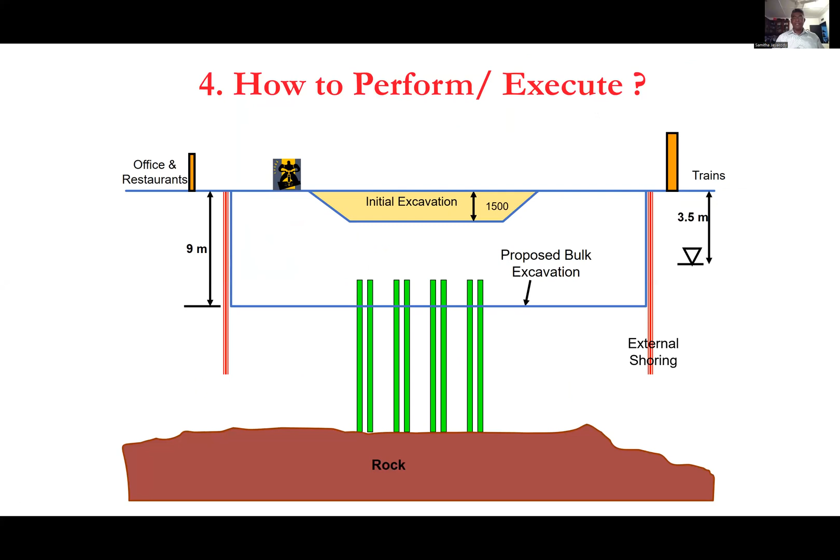Then we'll do the piling up to the rock. Then excavate in the tower area, the middle part, which is in the anatomy, the tower section, this one, that footprint. So that footprint, we will excavate that one first, not whole. Then hack the piles, then do the basement, ground floor, construction.

So the tower is moving, keeping the balance work, that is the podium, to a later stage. Then later on do the excavation and complete the basement. While you are doing so, the tower moves. Your tower section is the most important, that we have to start at our earliest.

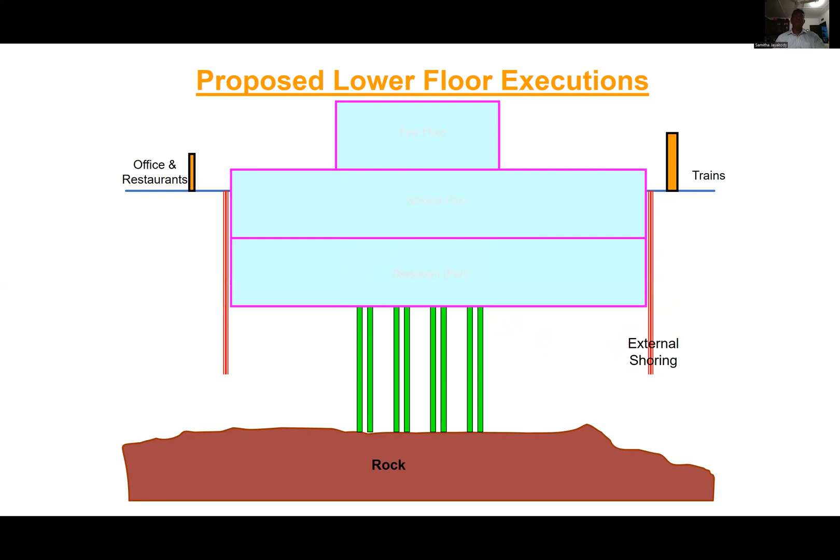The bedrock is comprising 2 layers. The topmost generally is fractured, but it is supposed to be solid rock, or rather hard rock. And bottom is solid rock without cracks. Sometimes the cracks go up to some depth, but during the soil investigation you can have some idea where the weathered rock is, what is its thickness, then where the fractured rock happens.

So normally the pile has rock socketing, that is rock anchor, measured from the bottom of the weathered rock to the hard rock. Normally this rock socketing counts from the bottom of the weathered rock and goes up to solid rock. Normally for a high-rise building of 20 stories, we have to have at least 1 meter rock socketing. In some areas I have done about 6-7 rock socketing into the rock.

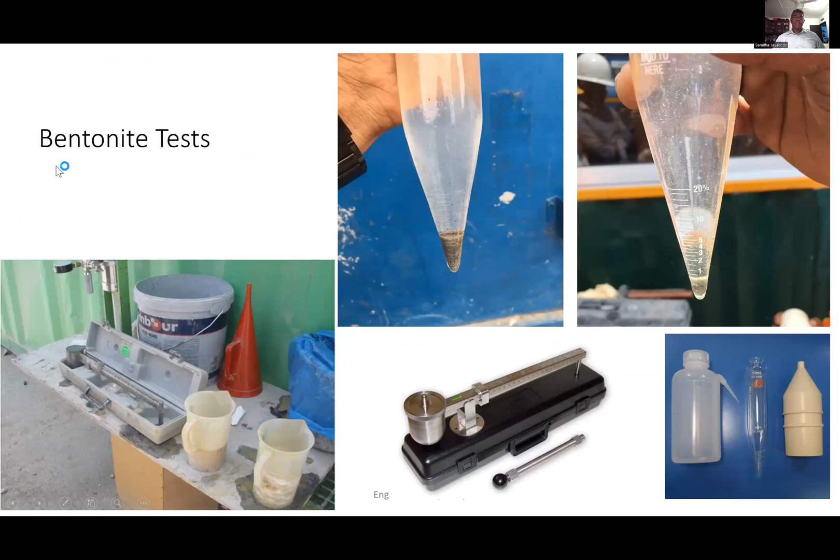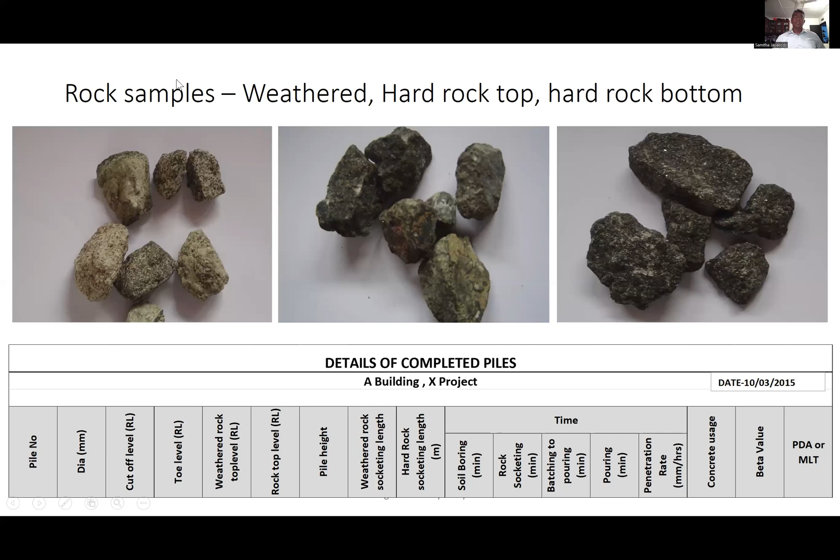And we have to do the piling. So when you are doing the pile, there are different things that you have to be concerned with. I will try to show you. Bentonite is very important to stabilize the ground. And identifying the weathered rock, fractured rock, and the solid rock is very important. And we have to maintain a pile log, something like this. It's a very important project management tool for monitoring piles.

There we will be incorporating the pile number and the pile diameter. Then we will also include the machine number, operator's name, then the toe level, the cutoff level, then the weathered rock top level, bottom level, then total pile length, and the weathered rock socket thickness, then hard rock socket thickness. But normally rock socketing is hard rock. Weathered rock also we measure.

If there's a deviation from the given soil investigation report, in the rock socketing or the weathered rock, we can make a claim. So here you can see that 2 meter, 1 meter. So we can claim for that. Because normally we say in the pre-qualification, by looking at the soil report, we assume that the weathered rock thickness is 2 meters, and we will charge weathered rock boring also as soil. But if it is more, we can ask for a better rate.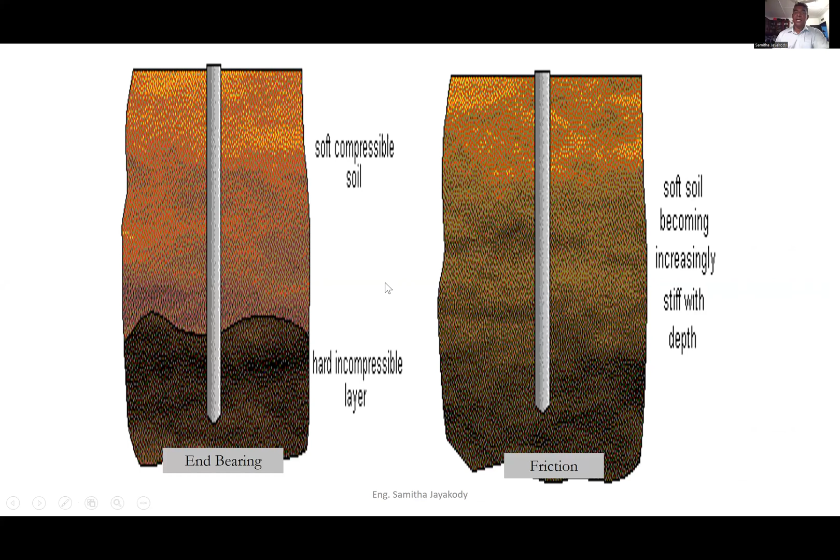So likewise, we have two pile types. One is going to the bedrock. Sometimes it's friction piles, not going to the bedrock. Normally in high-rise buildings, we go for bedrock. And negative skin friction is there. That is an addition to the loading that happens when there's a recent fill without compaction.

So during the construction, the soil gets settled because of the compaction, and also with time, the consolidation. Because of that, the soil settles downward and gives a downward drag, which is called negative skin friction. Normally, the skin friction is against the pile movement. So this means that the pile loading gets increased. This effect could be 10 to sometimes 40%, very significant.

So we have to see whether negative skin friction is happening. It happens only where there's a loose fill or consolidating soil. So that's very important in the design. Otherwise, the piles might get settled, and the building settles.

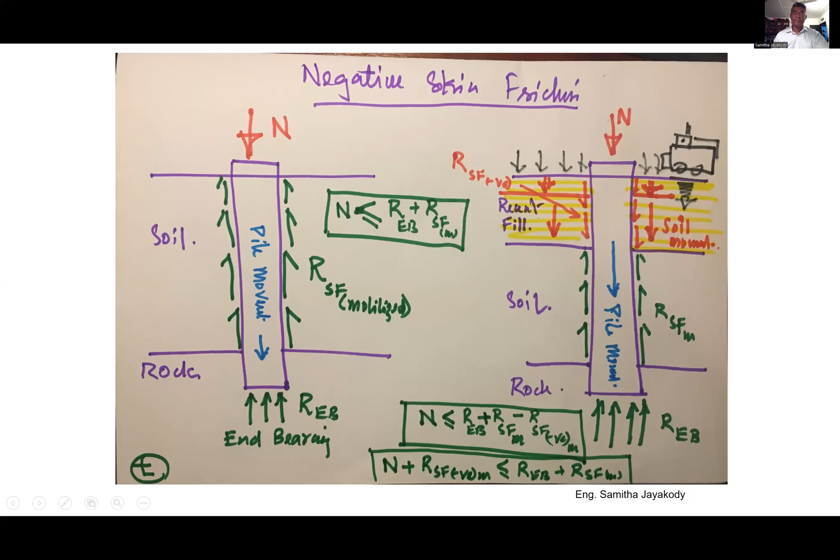So unforeseen ground conditions will also be there when you're doing piles. Sometimes there will be a hole. So if you do concreting, there will be endless concreting. Because of that, sometimes you have to put a cylinder from top to bottom, and it cannot be taken out. It is permanent. You claim. Then how do we identify it? By the soil log. We can also use this scanning technology called soil resistivity imaging.

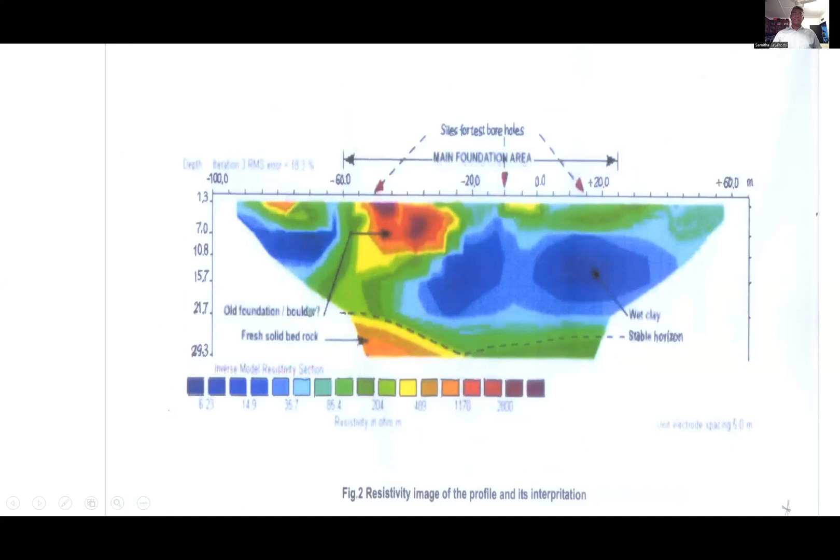Then we have to do the piling, and later we have to see the offsets. Offset has to be plus or minus 75. Beyond that, we have to alter pile caps, and it is the responsibility of the piling contractor. Sometimes the piling contractor does the work and vanishes. The main contractor has to take this bad piling effect. Because of that, normally we keep a big retention until this is cleared from the piling contract.

So it is very important that we give extra conditions in the contract, because for example, if you take pile 70, the offset is 165, 268, while the allowable is 75. So it is beyond. If the deviation is more than 300 millimeters, because of the eccentricity, we might ask the contractor to do an additional pile at their cost. But a small deviation, even 75, is acceptable.

Beyond that, sometimes we might ask the contractor to do a fresh design, increasing the pile cap reinforcement, and also sometimes the thickness. Managing the project, sometimes it is profit making, sometimes it is losing.

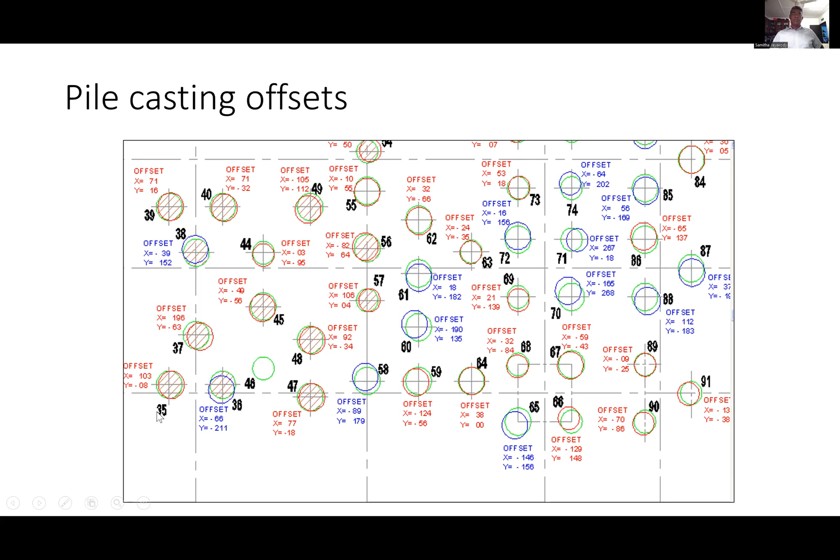So these are some of the gadgets in piling, and there are challenges of piling: edge collapsing and positioning. What we do is put a cylinder, then that challenge is gone. Then later on, when you are going beyond the water table, there will be water pressure, and the edges collapse into the hole. To stop that, we put in the bentonite.

So internal pressure is more. Bentonite is coming up to the top. So there will be two different hydrostatic pressures, but the internal pressure is higher. Bentonite density is also higher than water. It pushes out the groundwater in the pores, and bentonite enters into the soil skeleton, which will stick the soil particles. There will be a gumming effect.

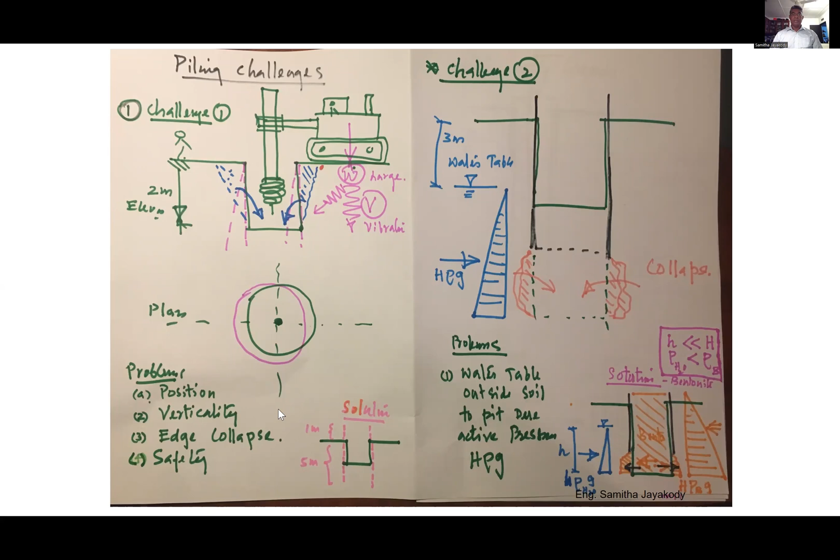That effect we call edge stabilization. Because of that, edges might never collapse. So that is the second challenge. The third challenge is identifying the weathered rock top, hard rock top, and hard rock bottom in the rock socket. It's very important. We can do it by visual inspection, the sound of augering, penetration rate, and also from the soil report.

Then another challenge is the end has to be cleaned. When you're augering with bentonite, sometimes a lot of pebbles collect at the bottom. The bottom is not clean, and the bottom is the most important part of the pile. What we do is end flushing, cleaning the end. So this is the visual sample for identifying weathered rock. Fractured rocks have some crust on the face. Then solid rock is solid.

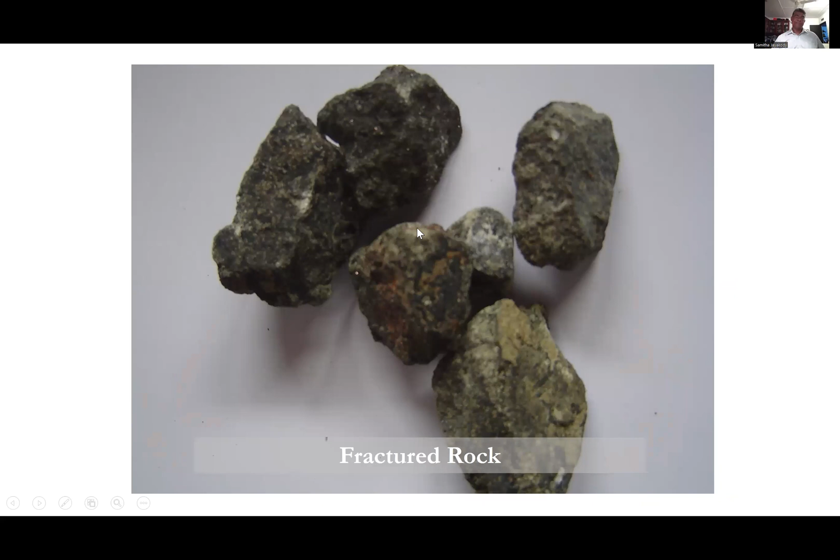Then this is the concreting. Once the bottom is clean, you pour the concrete to the bottom using the tremie pipe and the funnel. The first concrete will mix with bentonite because of the drop, and the concrete becomes weaker, density becomes looser, 1,500 kilogram per meter cube, light.

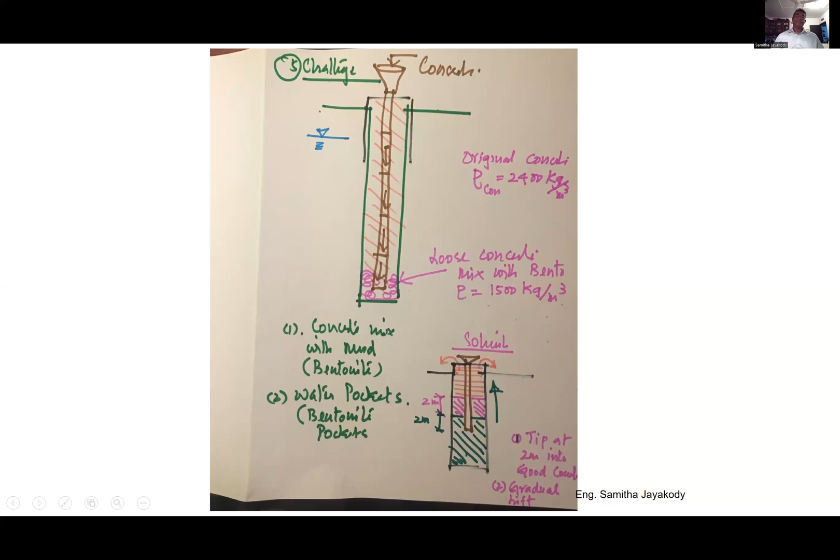But the original concrete is 2,400 kilogram per meter cube. Because of that, two different materials - the one with higher density is the original concrete. So once you pour continuously, better concrete goes to the bottom, and there will be a frontier of bad concrete floating over the better concrete. So the tip always has to be kept under the better concrete. That is how you do better concreting.

This is some operations, the cylinder bracing, and the under ream, if possible, if wanted, if in the design. So it's a larger portion in the middle, which will increase the bearing capacity of a pile drastically.

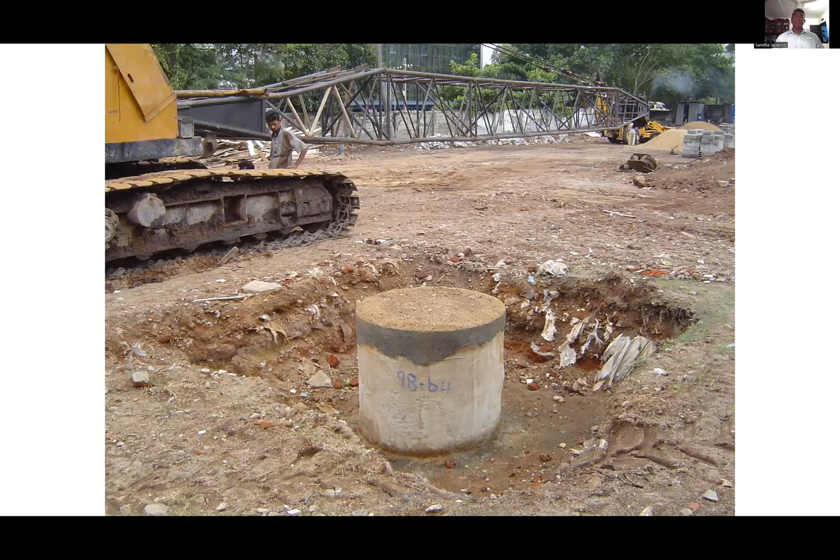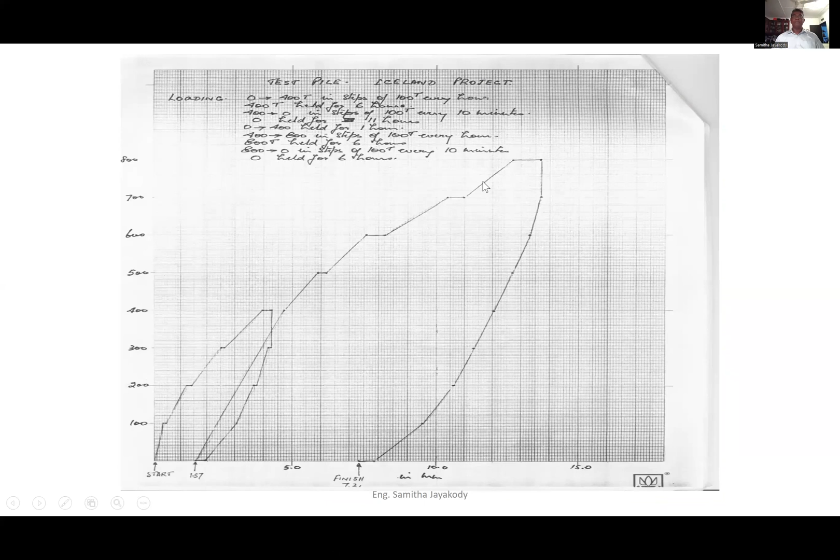Then in the pile we also have testing. So the static load or maintain load test, which is a prototype test, where we measure the settlement and so on, and also PDA testing. Under PDA we'll be getting the beta value. Then PIT test, that is a pile integrity test, a small test. There it will give the integrity, the beta value.

Then we also have the Osterberg cell, O-cell, where we will be putting a jack inside and load it using pressure. So there we will be giving pressure to the jack. The jack will exert both the pressure, bottom and top. Then we will be measuring the bottom settlement and the top settlement. So we can check the bottom concrete using this test, but it is a very costly test.

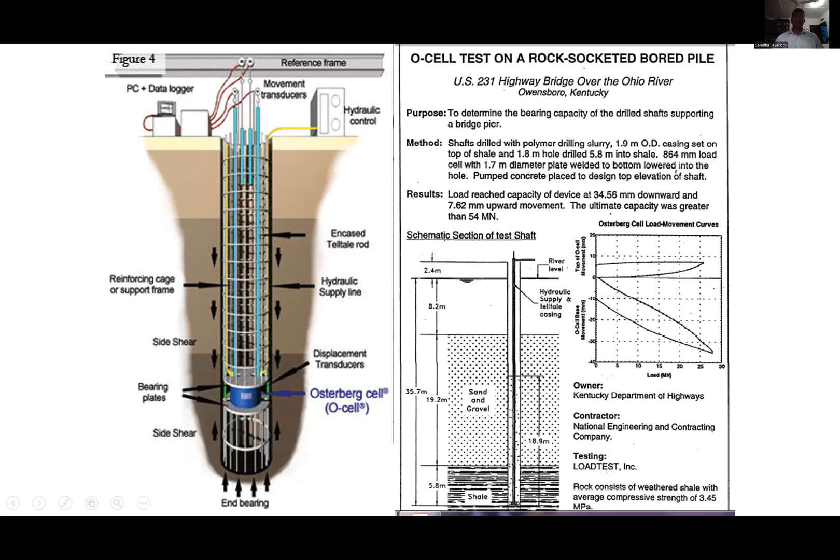These are some of the test costs. Static load test is nowadays 2 to 3 million. Dynamic is 1 million. Integrity is 15,000. These are the proportions - sometimes 1% static load test, 1 to 10% is dynamic. Then likewise OCell, OCell is 20 million, one test, not practical.